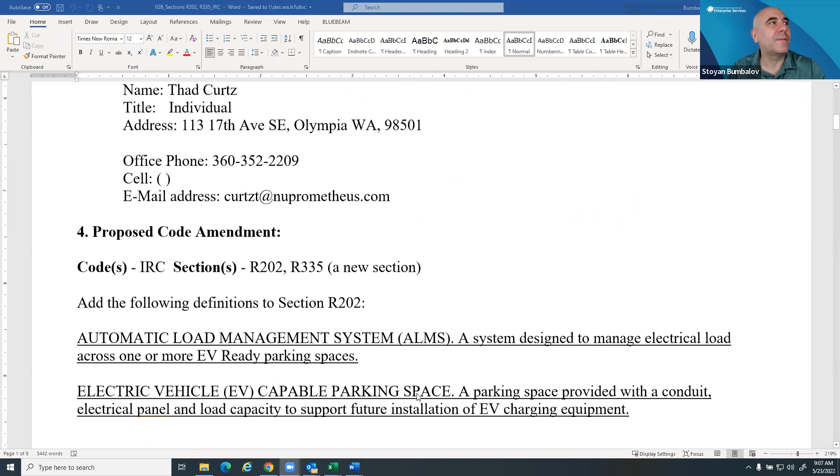So this is for electric vehicle. Yes, the proponent is here. Should I say something by way of introduction at this point? Absolutely. Oh, you get the stage.

HB 1287 requires the Code Council to adopt residential and commercial codes that will support the anticipated levels of zero emissions vehicle use that result from the state's zero emission vehicle requirements, and that will achieve the reductions needed to reach the state's greenhouse gas emissions limits. As part of reaching those limits, the state is committed to phasing out new gas and diesel light vehicles by 2035, and has just adopted a clean fuels standard and an aspirational 2030 phase out goal. These state policies will require a dramatic increase in EVs on the road and a dramatic increase in chargers for them, long before the buildings we're constructing now are obsolete.

Charging at home is the simplest and cheapest way to charge an EV. It's also much cheaper and easier to provide the means for that when residences are being built than for individuals, tenants, or owners of larger residential buildings to add that charging infrastructure later. The council has already adopted changes to the IBC in response to 1287's requirement. My proposal is intended to provide for the residential half of that requirement. As I understand it, there are several differences between Kathleen Petrie's proposal addressing this issue and mine.

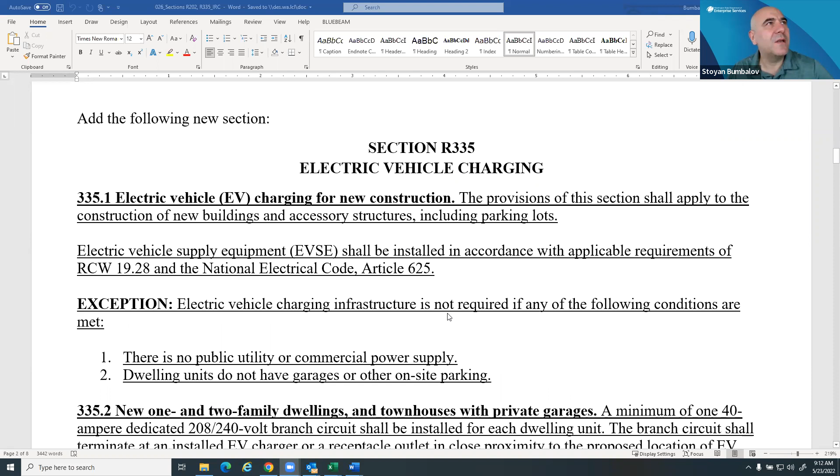Do you want me to start with the definitions? As far as I see, the definitions are the same as the definitions adopted in IBC. Is that my understanding? So I can skip the definitions then and get to the language right here. Micah, is that all right? That's perfectly fine. I can't remember, Stoyan, did we eliminate or modify some of the definitions for the building code? I know we had some that were doubled up or similar in scope, so I can't remember if we modified some of those or even changed one or two.

Do you mean between CR 102 and CR 103? Correct. No, we didn't touch anything. Okay. All right, then — do any of the TAG members have questions on the definitions? All right, I'll take silence as a no. Then we will start at the proposed change to, or new addition of, R335 for electric vehicle charging.

And again, I'll open the floor for TAG members to start discussing. This is Ron, I've got a couple of comments on it, if I could. Absolutely, please. Okay, so in there it talks about all new buildings and doesn't single it out as really for the IRC, which may or may not be a little bit of a conflict. When it talks about all buildings — so I live on a 25-acre farm and I want to build a machine shed for my diesel tractors, and now, because I have parking on the property, I have to put an EV charging station in. There's no exceptions for accessory buildings that don't even have electricity to them. So maybe he can address that.

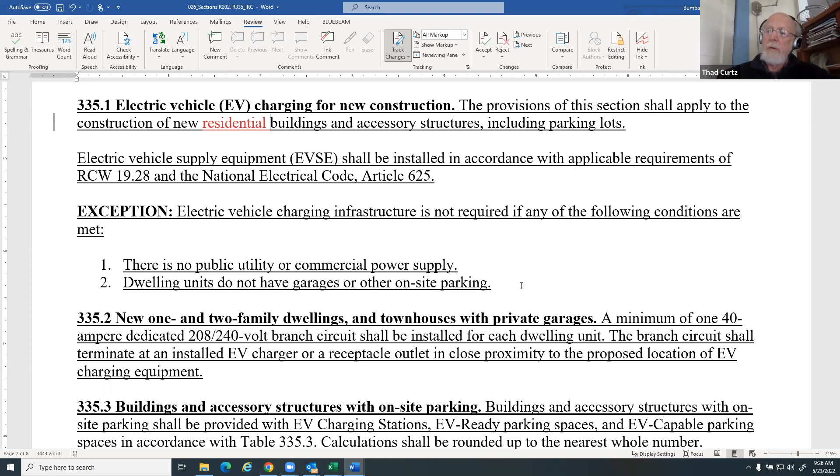No. As I understand the proposal, if you have a private garage, all you have to install is a 240 receptacle. If you've got a building with parking spaces that are not private, then you have the same requirements as the commercial code that the council has moved forward for public comment.

Thank you for muting. So in the proposed 335.2, you're saying there's a receptacle outlet in close proximity of where somebody may put in charging equipment. So the requirement here is for the electrical capability, is that correct?

Yes, it's to have an actual plug in the garage so that somebody can just buy a $400 charger if they get a car and plug it in there without having to do anything else. Or it's also possible to meet the requirement by actually installing a charger when the building is constructed, but that's not necessary in this proposal.

Okay, thank you, I appreciate you clarifying that. Thank you, Todd. Can we scroll back up just a little to the beginning of the section again? Starting right there is fine.

I do have some concerns with the charging language. Although it indicates it applies to new residential buildings, it says 'and accessory structures.' Obviously accessory structures are incidental to a dwelling, so this is telling me you would actually have to provide two outlets on a site if it had a dwelling unit and an accessory structure, because it says both. Then in the second line, the electrical vehicle supply equipment, you're pointing to the NEC, which may not be correct per the residential code, because the residential code does cover electrical items, however that may not apply for Washington state.

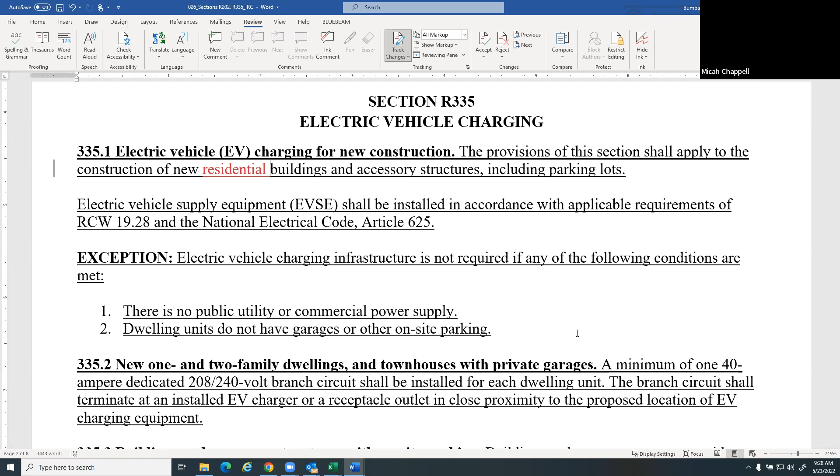Then we get into 335.2. I agree with Todd. The way I read that, it indicates it shall be installed as a charger or receptacle. But when you get into 335.3, that doesn't give you the option—it says buildings and accessory structures. So again, that will be two locations if they're both on the same lot.

For 335.3 says shall be provided with EV charging stations, period. That's what 335.3 says. So again, I'm going to parrot Todd's concern that this tells you your building and accessory structure for new construction has to be provided with a charging station. That's what 335.3 says.

Just to clarify one thing in relation to your remarks, my rationale for not allowing the receptacles if you don't have private parking is that if you have a receptacle and you plug your own charger into a space that's not private, you're exposed to somebody strolling along and unplugging your charger and walking away with it. So we'd go from having catalytic converters picked up and stolen to having chargers in non-private parking areas picked up and unplugged and walked away with. I don't think that's very satisfactory.

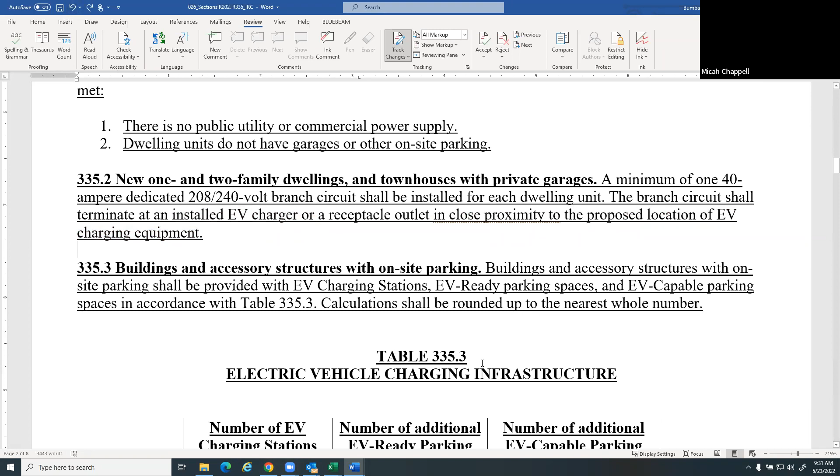That's fine, it can be either/or in that scenario for the private garage, if that's what the proponent wants. I do have my concerns with the way it reads, but really my other concern is going to be 335.3, which states if you have on-site parking, you have to provide EV charging stations at your building and your accessory structure.

Others can go ahead. Quinn, go ahead, you have your hand up. I was wondering, if it changes to buildings, or changing 'and' to 'or,' would that be better?

I'm not sure, I think it still says if you have one or the other, you still have to provide on-site or EV charging stations just because you have on-site parking. And I probably read it differently than others.

Jen? I think you're muted, Jen. Thanks, I have the same concerns that you just expressed. Also, again, seeing that maybe this language is sort of borrowed from the IBC. What is on-site parking? I don't know if that's a definition above, but that's not really clear.

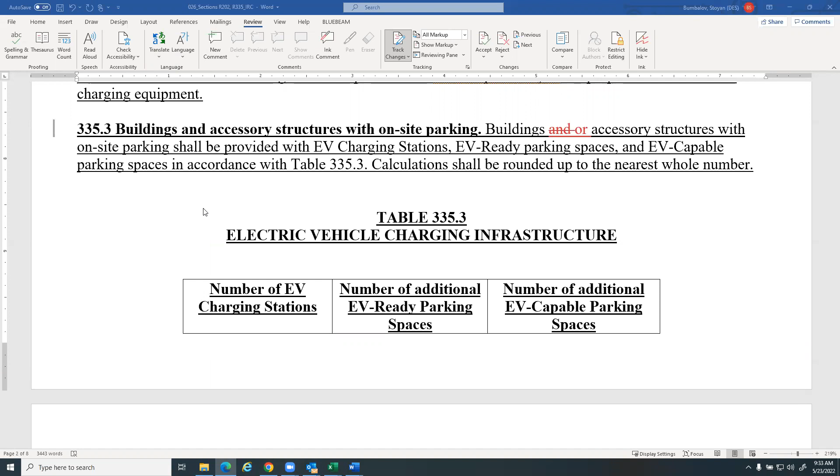As clear as IRC. So with, say, an apartment building, there are defined parking spaces. But if you have a detached garage and a gravel drive that goes over to it, is that considered on-site parking? So how you even split those hairs is unclear. If you have an accessory structure in the backyard with a garage and a driveway at the front of the house, what is considered the on-site parking for that accessory building in the rear?

And above here, 335.2, so you have a new single family residence. You may also have an accessory dwelling unit within that new single family residence, which hasn't been really common until now because land use guidelines have prohibited that, but that is changing as affordable housing is needed. So you could have a new single family residence with an accessory dwelling within it, and then a private garage that is only accessible to the main home. But now you're going to need two circuits within that garage, even though the occupants of the accessory dwelling unit may not be able to access that garage. Does that make sense?

Seems so, I think I see where you're going with that. So it sounds as if I need to look for some new language that will clarify this issue. I had thought that if you had a single family residence with a detached garage, that would count as an accessory structure, but it's obvious there are some other accessory structures I hadn't thought about. So I think I should probably try to work out a revision of this language and bring it back.

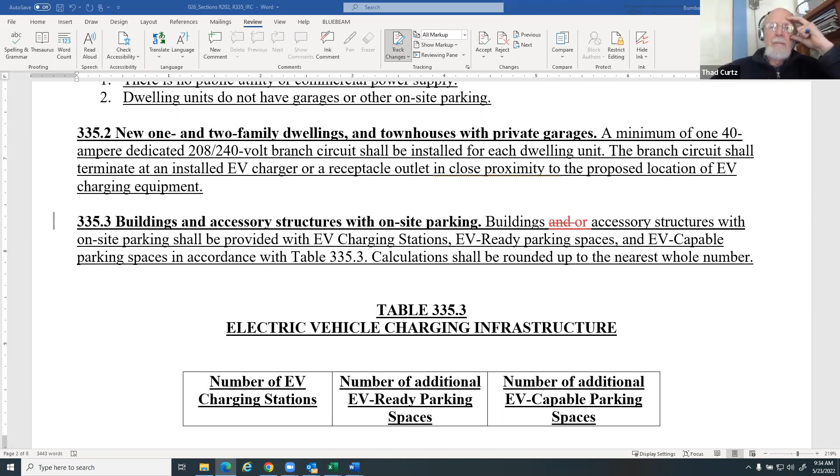Okay, sounds like an idea. Jen, you have your hand up again, and Quinn. Yeah, some accessory dwelling units may not have any parking at all, so just keep that in mind. And also the exception seems misplaced - it's like we have the exception before we have the requirement, in a way. So organizationally, it seems like we typically say this is exactly what's required, and then here's the exception.

Thank you for those recommendations, Jen. Quinn? Yeah, so I might be a minority on this one, but I actually kind of like the direction that Thad is going with this. Some of the concerns that were raised, I just personally don't see it - at least that's not how I would have interpreted some of the language. But I do see there could potentially be confusion moving forward with the way some of the language is written. So Thad, if you take some of the recommendations we just talked about and clean it up a little bit, it would definitely be a lot better. But for the most part, I like it. And I don't have a huge concern over any of this stuff because that's how I interpret it, so I would have voted for it with some caveats.

But if you come back later with some changes, like putting the 'or' in there - I wasn't too concerned with Jen's concern about the ADUs, because it's a single family residence with an ADU, so it's still considered a single family residence. So that garage, if I were to review it, I would still only require one. But anyways, just clean it up a little bit, and I think it might be better moving forward.

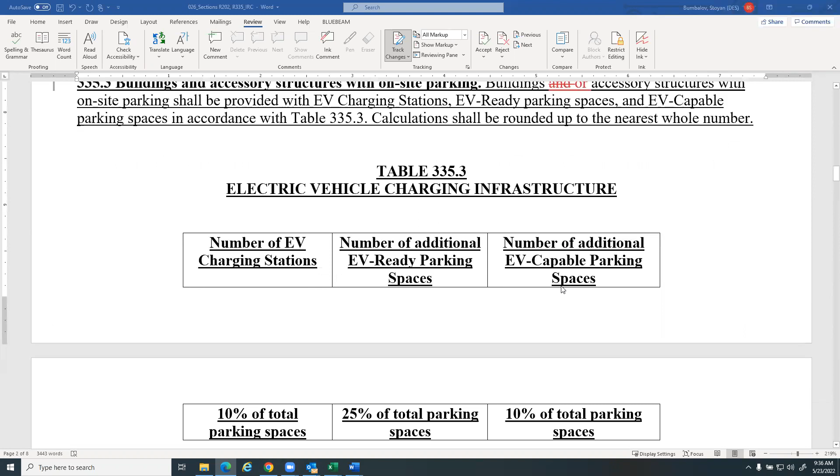Great, okay, so I just need some clarity on how this table is enforced. When I see this, say I've got a 2-car garage with parking out in front of those 2 doors to my garage, I'm understanding those as being 2 on-site parking spaces. Therefore, I need to follow this table to determine what additional features I need to build in.

As I'm looking at this, number of EV charging stations, 10% of total parking spaces, round up to the nearest full number, therefore I need 1 EV charging station. Going to the next column, number of additional EV ready parking spaces, 25% of total parking spaces, so I would need an additional EV ready parking space over and above the EV charging station.

Then I go to the 3rd column, number of additional EV capable parking spaces, 10% of total parking spaces. I'm adding another parking space because up in the charging language, it talks about 'and' - EV charging station, additional EV ready parking spaces, and EV capable parking spaces. Is it your intent that you would actually require 3 additional features with regards to EV charging?

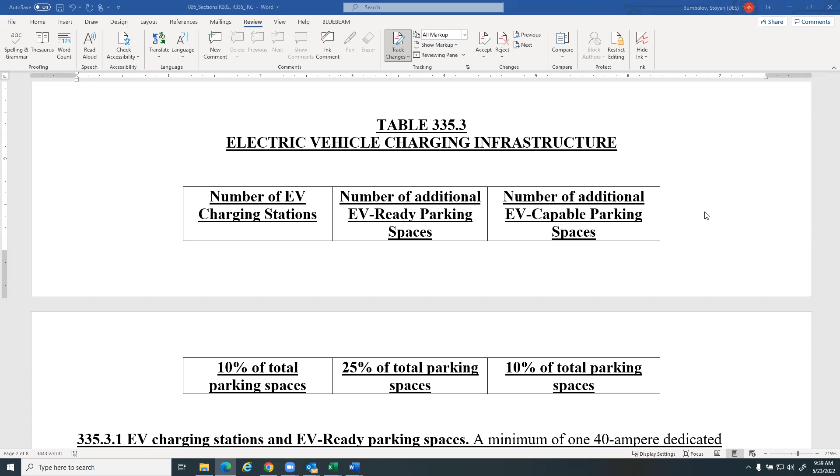I think we need to look at the scope of what the International Residential Code actually covers and keep that in mind, because the bulk of what you're building with the IRC is single family residences. So you're not talking a 40 unit townhouse project, that would not be something under this code. I think it is confusing in the way the charging language says you're going to have each of these, and here's the table and the percentages round up to the nearest whole number. Just following the words on the page, I'm coming up with a requirement that you have 3 features at that 2-car garage.

So if I have a townhouse that has 50 units with shared sidewalls, that's not built under the residential code? That's what this is intended to apply to. If you have property lines separating each building as its own property, its own lot, it would be its own building permit. But if I don't have property lines separating the buildings, if it's a 40-unit townhouse for rentals, I don't see that being built under the IRC, and maybe one of the building folks can chime in.

We have a hand up from John, did you want to provide some input on that? Yeah, just in response to that, yes, theoretically, you could build a 40-unit townhouse, 50-unit townhouse, whatever, under the IRC. It's not generally done, but it can be.

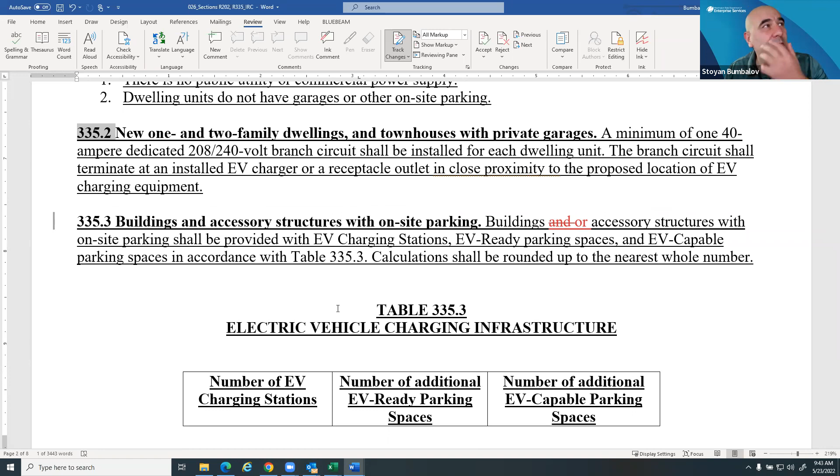So we have 3 different types. We have 1 and 2 family dwellings, this is the first one. We have townhouses with private garages, this is the second. And then we are going to 335.3. I think, listening to the comments, I think you folks are mixing up 335.2 with 335.3. So if you have garages, then you're under 335.2. This is how I see it. But in 335.3, this is for common use parking spaces. At least when I was reading the additional information, this is what I got.

Okay, 335.3.1. I do think that's one way to interpret it, Stoyan. When I look and read 335.2, if you want to scroll back up since you were discussing that. If there's no private garage for 1 and 2 family dwellings, I would interpret that if there's no private garage, then you would have to go to 335.3 to find your required EV, either capable, ready, charging station, whatever. That's how I would interpret how this is written, and others may chime in to see if that's the same, but that's how I read the titles there in the charging language. 335.3 would apply to everything that doesn't have a private garage that is provided with on-site parking.

What about that? What about detached garages? Where would those fall? It doesn't really specify between attached and detached garages. It says just townhouses with private garages. Right, again, based on what I saw with the additional documentation.

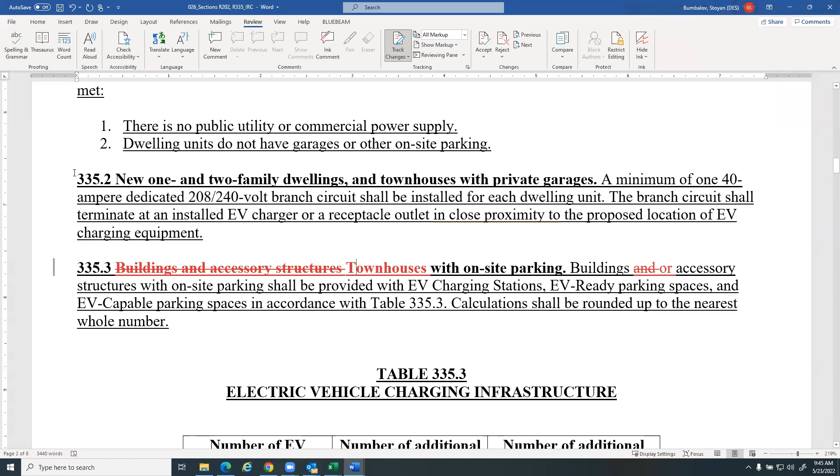Hey, so John, again, what would you follow, 335.2 or 335.3 for a detached garage? I would apply 335.2. What about if it didn't have power to it? Well, then the general exception would apply.

Would there be an opportunity or a friendly amendment for there to be clarity on parcel versus building specific on that particular exception? Oh, I can't speak for the proponent, but I think he promised that.

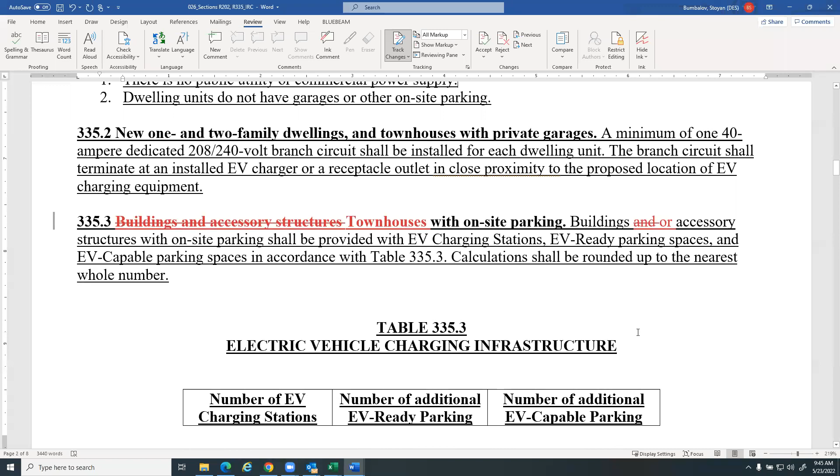Okay, so with regards to 335.3, can we choose to put in an EV charging station, an EV ready parking space, or an EV capable parking space? It's, you know, what are we supposed to install under 335.3?

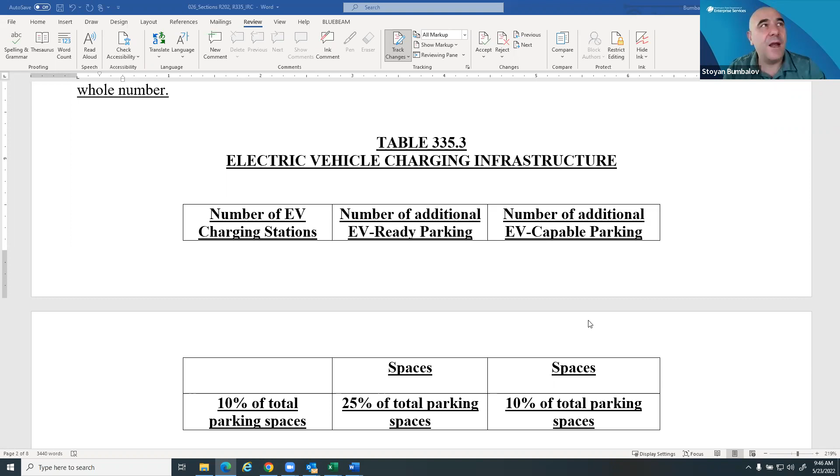I just compared with what the council adopted for IBC, and the language seems similar, if not the same. So for 335.3, it makes it the same. I'll give you an example. You have a row of 50 townhomes built under IBC versus the same type of building structure, but built under IRC. And the proposal is the same here.

You need 10% with electric vehicle charging stations. You need 25% with EV ready with receptacle, and you need 10% with conduit. And so I wasn't the proponent for the IBC proposals, and I don't necessarily agree with it, but it was adopted. That's okay. Thanks, what I'm saying.

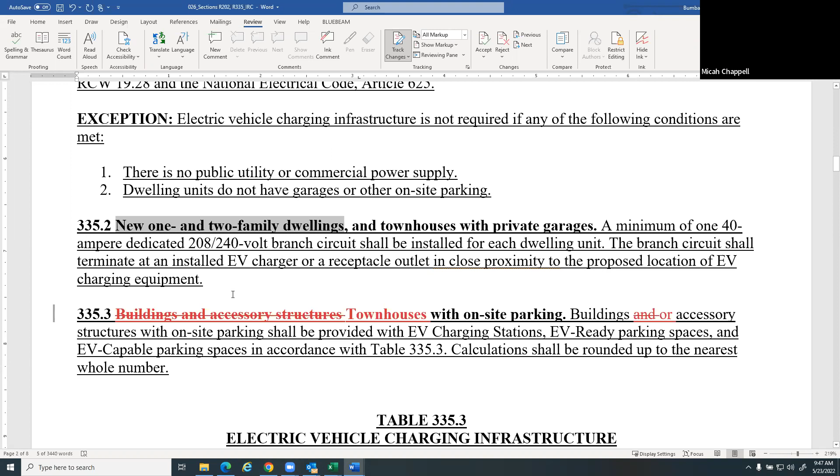Yeah, sorry, just from a code writing standpoint, first of all, remember that section titles are not enforceable. So you need to incorporate whatever you're pointing at into the charging language. The way I read 335.3, it says buildings shall be provided with these, so it doesn't apply to the parking lot. That's the way, if you're reading it literally, that's the way I would read that. So just again, some language clarification and some better charging language would probably help here.

But John, do you see that requiring at every building a charging station, an EV ready parking space, and EV capable ready? Well, it depends on what the current language is, not clear. I'll say that if the charging language is improved, it could help answer that question. I think the charging language in 335.2 needs improvement as well, for the same reason, kind of to say that this applies to all 1 and 2 family dwellings and townhouses. If you've got a private garage, this is what you do, whether attached or detached. Again, that should be part of the charging language.

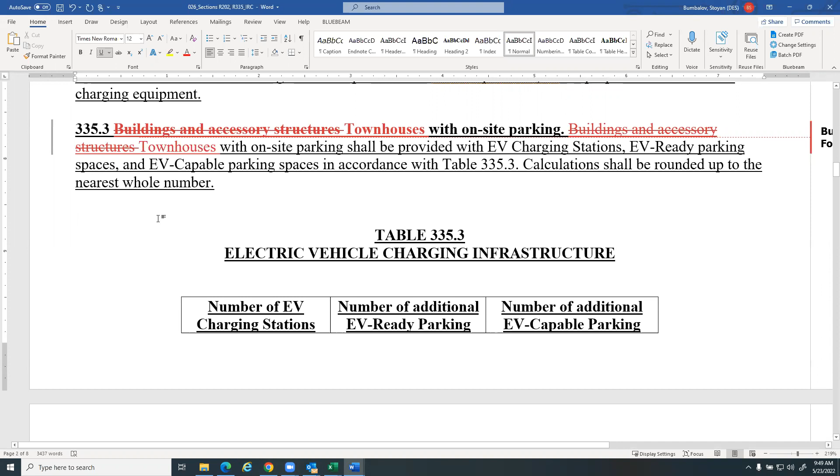Okay, thank you, John. Darin? Just a quick clarification on 335.3. Stoyan, was that supposed to also include accessory dwelling units?

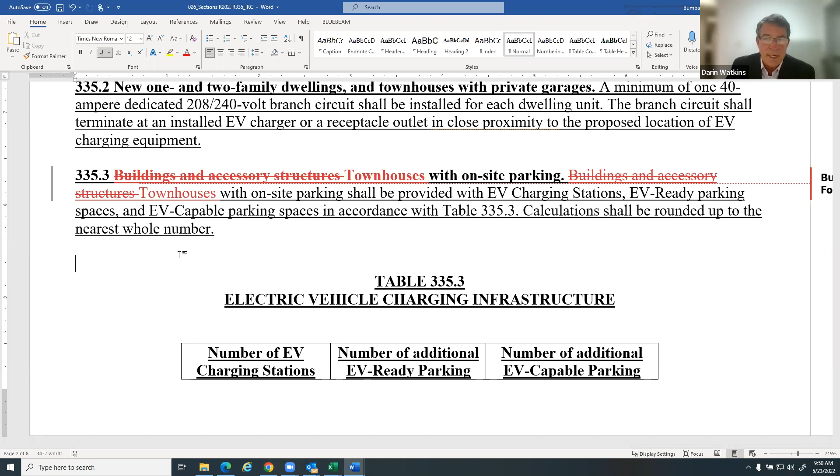Well, again, I'm not the proponent here, but comparing to the rationale for section 429 in the building code, it says it was trying to cover on-site parking. So you have the on-site parking for a row of townhomes. I guess this was the intent. I don't know if it's a good explanation in the section, but this is how I read the rationale behind it. The reason why I ask is because many of the accessory dwelling units are no longer being required in the Seattle and King County area to have dedicated parking spaces, and I'm curious how this language would address that.

Well, if it's 335.3, it captures the number of on-site parking spaces, it doesn't capture the number of units. Again, I'm reading the rationale for 429, and it seems the language is similar. However, I want to caution that this is a different code, and there's reasons it is a different code, so the language is not going to align or match.

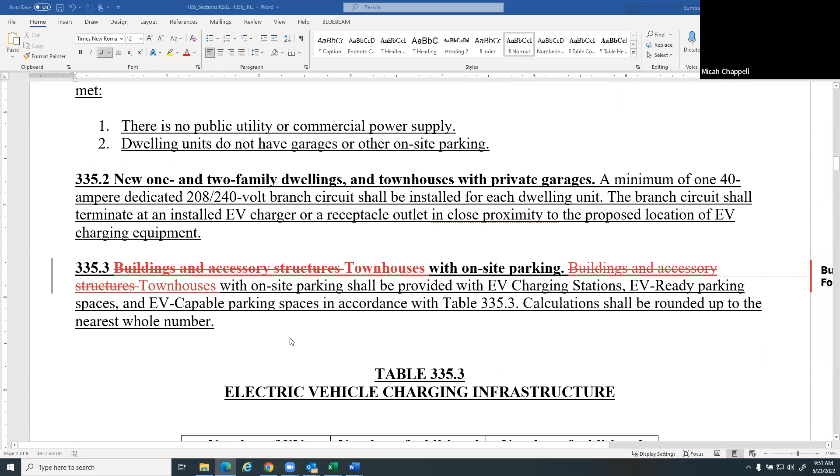Darin, my thoughts on accessory dwelling units: technically they are not in the residential code, they're just a dwelling unit, not something special. So this may do better to modify the charging language to be more clear, in that it seems like the proponent, and I don't want to put words in your mouth, Thad, wants some type of charging infrastructure for each dwelling unit, whether it's an accessory dwelling unit or a regular dwelling unit. I don't think the charging language gets you there, in my opinion.

Micah, when you say the charging language, which section do you want me to note? I think if you're going to modify the charging language, it should be the beginning, 335.1, because right now you're saying this section applies to new residential buildings, that's anything that can be classified as a residential building. Maybe that needs to be changed to dwelling units, or dwelling unit, singular.

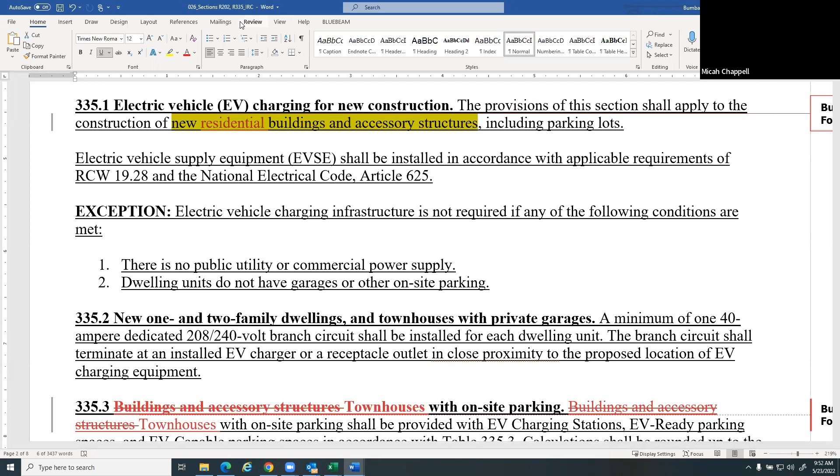And we're spending quite a bit of time on this. We should move on down the proposal a little more, get Thad some more information, and get on to some of the other proposals. I know we have a lot of big ones on the plate today, so hopefully we're giving Thad some direction. But let's move on to the next couple of sections of this proposal, please, Dwayne.

Yes, sir. Micah, can I chime in really quick? For some reason I don't have my hand raise button, I don't know if I need to restart Zoom or what.

This is Damon Doyle. Starting in 2011, we started putting in 40 amp 240 circuits in all of our projects, and in fact we started it on a townhouse project. It seems to me we have a lot of language in here that's commercial and not residential. One thing we did not do was actually put in the charger itself, so we just ran the circuit and put a blank cover over it, because there are 3 different types of charging circuits and we didn't know what people were going to choose. In most cases they're hardwired, not a receptacle. So I think simply providing the circuit so it's there for people to later put a charging station in is most appropriate. Currently less than 3% of cars on the road are EV. Granted, we know that will rise, but at least 9 out of 10 people who buy these units are not going to use these circuits. I would like to see this language simplified to say A, just a charging circuit, and B, for each dwelling. I don't think we need to go into parking spaces or anything else.

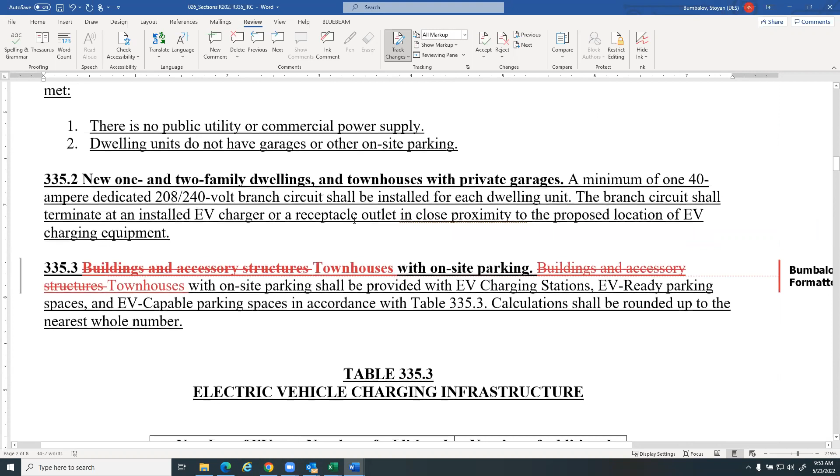That's all. Okay, thank you, Damon. And for those of you not aware, Damon is a current SBCC member representing residential contractors or builders, if I'm correct. That is correct, thank you. Appreciate you being here. Is it 335.2, Damon? Yes, that's perfect. If you had that as well as the 2 exceptions above, I think we're done.

Okay, thank you for that recommendation. That's something Thad can take into consideration when he brings some modifications. Let's go ahead and scroll down, Stoyan, and get into a little more and provide some additional feedback. That way, if Thad decides to come back with a full proposal like this or something simplified, he's got enough information.

All right, I'm going to again open it up for some comments to this section or these sections. I mean, I should just say this is exactly what the council adopted for the commercial requirements that it's moving forward with. And I did it this way basically because I thought it would be desirable to have consistency between the IRC's requirements for big townhouse construction and the commercial requirements. But...

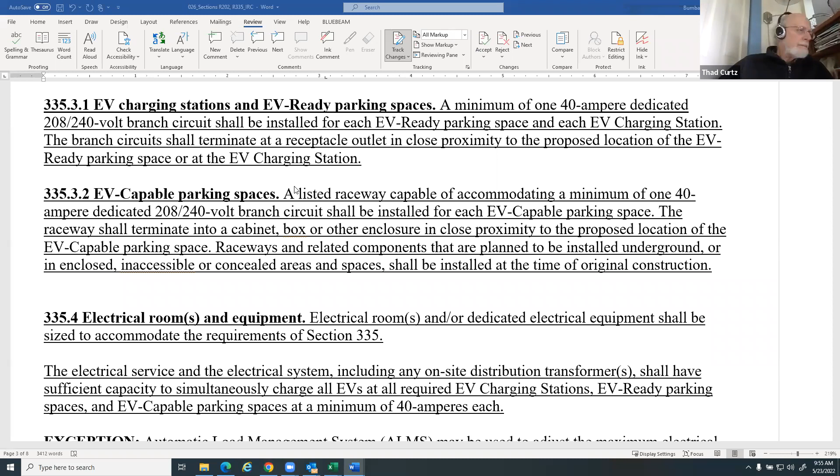Okay, thanks for that comment, Thad. Anybody else on these sections?

All right, I will provide a little input from me. I think that 335.3.1 is redundant, and then it also seems to indicate it's something further than what was required above, where the indication above was a receptacle. This says that if you have an EV ready parking space, that you have to provide more. It just seems to try to align with the IBC, but I don't think that's the best route.

This also talks about 335.3.2. This again is getting into electrical installation requirements, or raceways are covered by the NEC or other parts of the residential code. And this gets into a new section, a new chapter that probably, if we're going to use other sections, should just point to those sections and not duplicate the language.

And then this talks about a raceway. And correct me if I'm wrong, Damon, it's been a long time since I've done residential electrical, but normally in a residential building, you're not going to have a raceway. You are just going to install some type of probably non-metallic cabling within the wall space. Now, if you have a parking space outside, maybe that's still attached to the structure and within the wall space, or maybe at that point, if you have to go underground somewhere, you would need to provide a raceway. But this is saying you need to provide a raceway no matter what, and I'm not sure if that's correct.

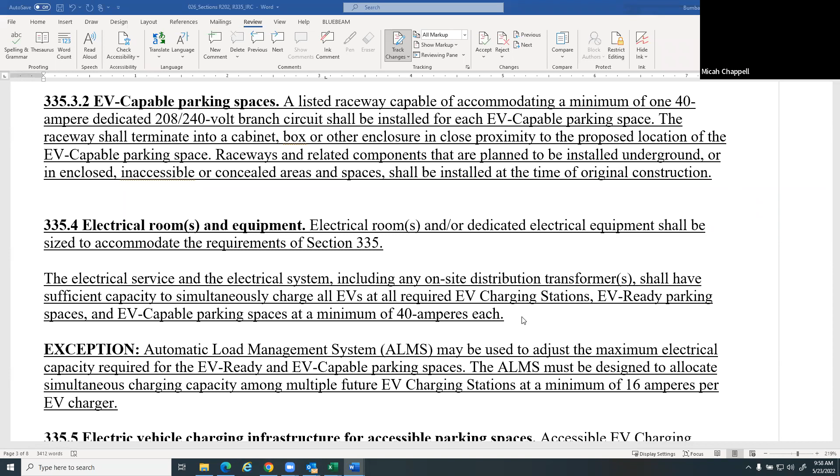All right, and then this last section, 335.5, I'm not necessarily opposed to this. I know that a lot of folks will say accessibility doesn't apply to single family residential. However, that may be a little different depending on the number of units you have for townhouses. But again, I could go either way on that section, but I will open the floor for discussion on that exact point.

There's no discussion on location of the charging stations, especially when you get to the 50 unit houses. So it's supposed to keep them limited, or how are they located? All the discussions we're having in our local zoning code is that they seem to be pushing ADA parking stalls off to the side so that these become more of a priority.

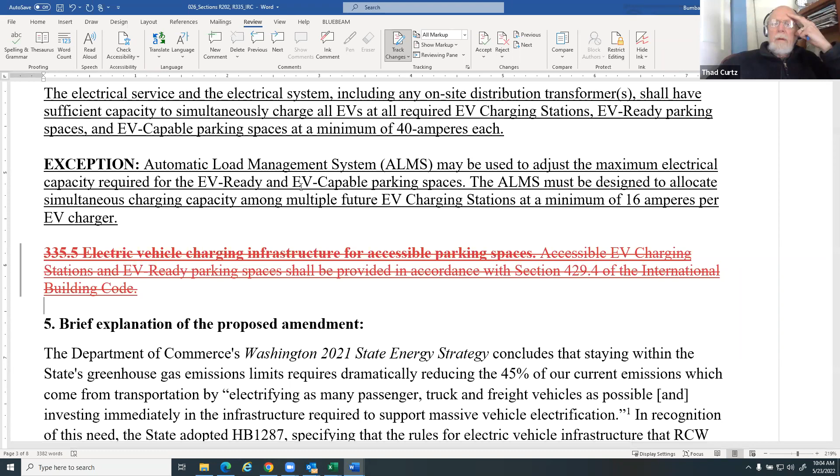Okay, thanks for that. Go ahead, Thad, did you want to respond to that real fast? No, I will listen to the recording. It seems like we've taken a lot of time here for this. I'll listen to the recording and come back with a revised proposal next month. All right, thank you, Thad, I appreciate your time. I will email you the document with the notes. Thank you very much.

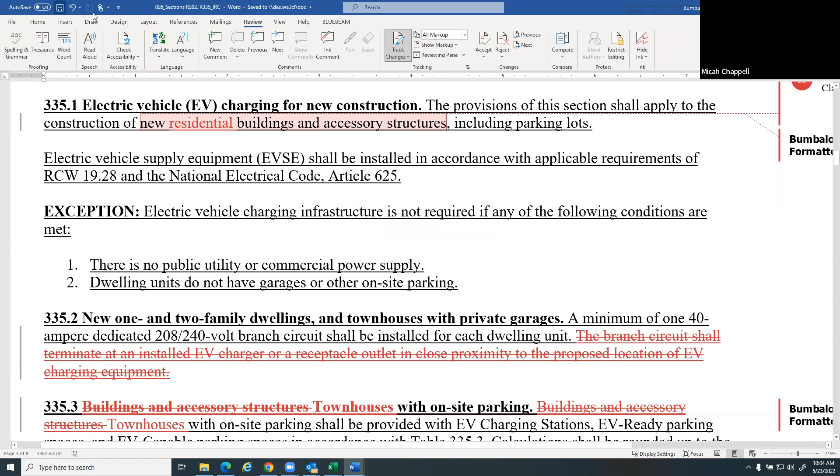Here it is. All right, this one's going to be a similar topic. So I will turn the time over to Kathleen to give us a little background on your proposal, and then we'll start discussing the sections.

Yeah, thank you, Micah, and hello, everybody. I'm Kathleen Petrie with King County.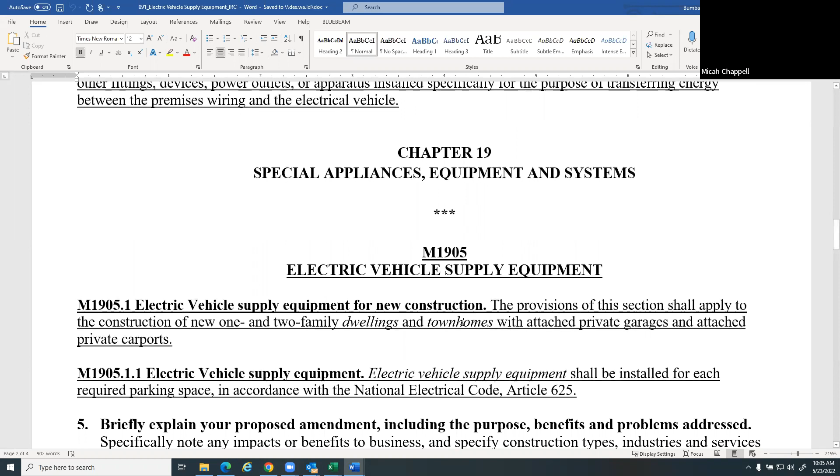Just wanted to have a proposal submitted with respect to EV ready. So whether it's Thad's proposal that moves forward or this proposal, either is great. We just want to have that infrastructure in there because of the zero emission policy by Washington State, 100% EV sales by 2030, or non-combustion sales. And so essentially, it's where there's required parking for attached private garages or townhomes, or carports attached to a single family or townhomes, that you have the required space be EV ready.

And so I didn't know if this should land in chapter 19 or in chapter 3, so I just took a crack at one of them.

The other bit is that I'm still a bit confused by the definitions in the IRC. Typically in industry, you've got EVSE, which is all the infrastructure plus the installed charger unit. Then you have EV ready, which has the circuit, wiring, and up to a junction box or outlet. The electrical code's EVSE doesn't necessarily specify that it has the charging unit at the end, so I didn't know exactly which term to utilize. But the intent of this proposal is that the space is EV ready. That's what I'd like to share. Thank you.

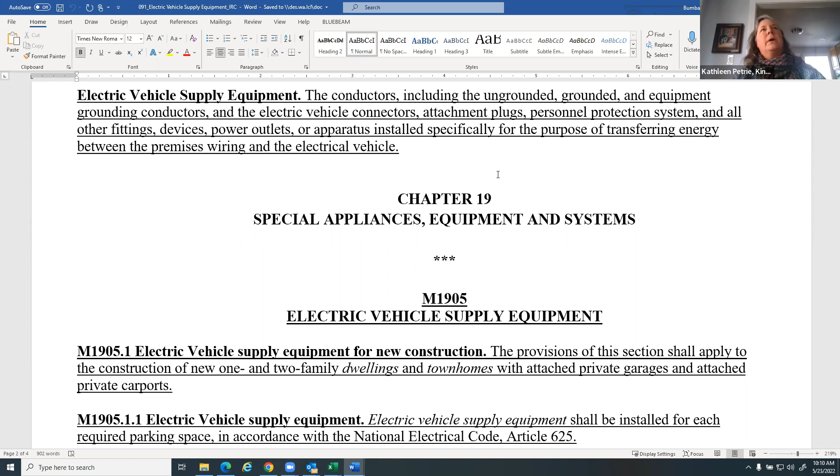Okay, I'm hearing you. So my interpretation of most codes is they would have like 1 space required per single family and/or townhouse unit. So I'm not sure the 3 would be triggered. So if just by switching the text to dwelling versus required space, would that be an appropriate change? In my opinion, yes. I think that keeps zoning departments out of the picture when it comes to identifying where EV parking spaces are required, because there are jurisdictions that don't have any requirements, and there are jurisdictions that have 2 requirements. It doesn't seem appropriate to have it change from one jurisdiction to the other. So let's just go ahead and clarify it and say for each dwelling unit.

Okay, thank you. We have a hand up by Darren and then Quinn. Yeah, just of note, the construction cost analysis was done in 2016 based on 2014 to 2015 data. That cost, I can guarantee you, is extremely low compared to realistic prices today. Just for example, the panel alone has gone up in price from about $540 in 2015 to about $2,200 right now, just for the panel. So as we're trying to stay consistent with good numbers, we ought to try to find something a little stronger than a 2016 study. We'll do so. Thank you.

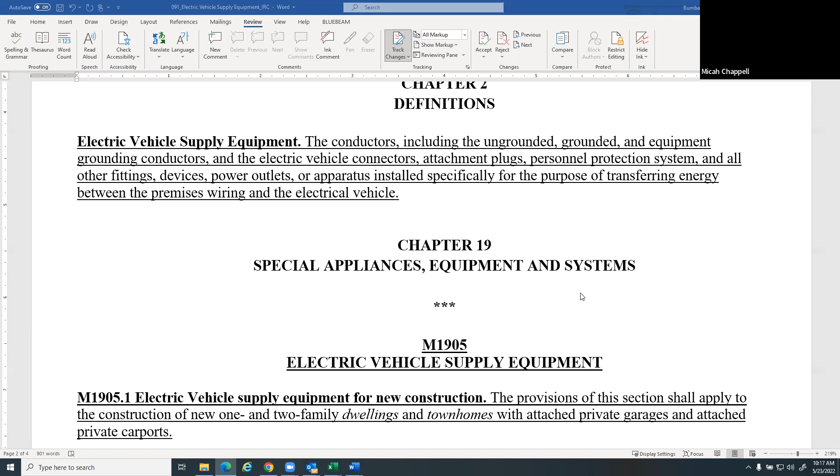And then as to the section, I do have a little concern with where the section is based, just on the charging language for mechanical. It states that the provisions of chapters 12 through 23 shall regulate the design, installation, etc. of mechanical systems that are permanently installed to control environmental conditions within buildings. So I don't think that section is correct, because this is not controlling an environment within a building. I do believe maybe that would fall better in one of the electrical sections, and I think that starts at chapter 34. That's just my initial opinion if we're going to put it in a further section in the IRC.

Okay, great. Thank you. Appreciate that. And then Thad, you have your hand up. Please go ahead.

From the point of view of a homeowner, I want to argue strongly in favor of a receptacle rather than a junction box. Most homeowners are not going to mess with adding a receptacle to a 240 circuit, even if there's a junction box there. So from a homeowner's point of view, having a junction box means finding an electrician and getting bids and paying for that upgrade.

Whereas if the receptacle is there, they can just plug in. As far as the different charging standards go, my understanding is that currently for level 2, 240 chargers, there are really only 2 standards. There are 3 standards for 480 chargers. But for 240 chargers, there are 2 standards, and one of them is going to go away. In any case, the actual plug configuration is irrelevant, because you're buying a charger that has the plug configuration you're interested in for your car, and then you're plugging the charger into the standard 240 NEMA outlet. So I think a plug will work fine in this situation.

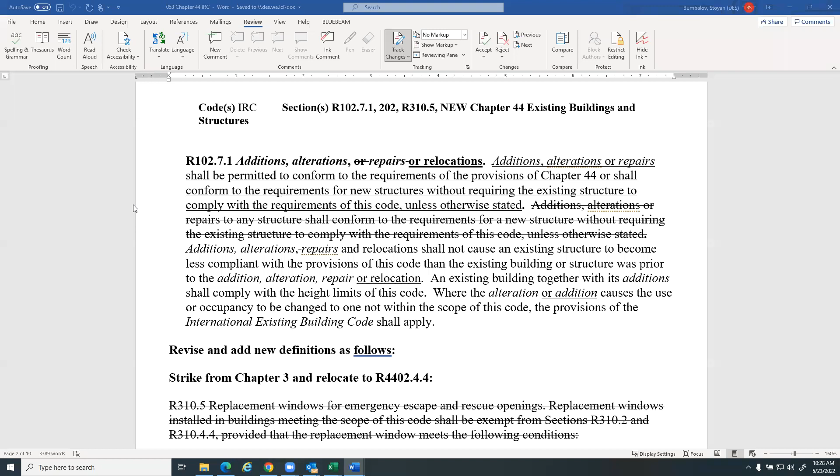Okay, I think maybe you can walk through it, and as folks process it, we can start asking questions. Okay, let's scroll down a little bit. The next modification is just deleting some text from chapter 310.5 regarding replacement windows, and it's being put in this new chapter 44.

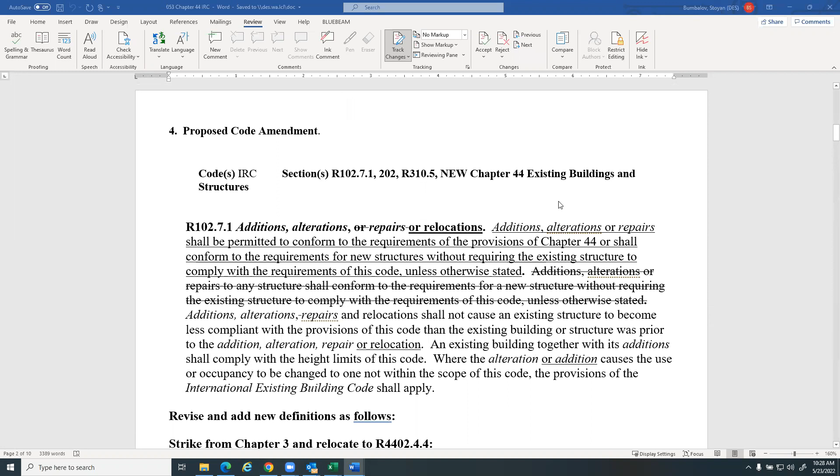I have a question, and I can't see the scrolling screen here, but in 105.3, there's a discussion about unless there's a change of occupancy. I think I asked this before, but would like clarification. So if I have an unfinished basement in a 1940s home and I create a bedroom, is that going to be considered a change of occupancy?

Yes, it would, if it was an unfinished basement and it was not previously habitable space, then yes, that's a change of occupancy. Well, let's say it was just a family room, so it was finished and it was habitable space, and now they want to just frame in a bedroom, but we have an undersized window. Right, so then that would not be a change of occupancy because it was single family habitable space previously, and now it's going to be a bedroom, which is still single family habitable space, but you would just need to meet the requirements for window replacements in this new chapter 44.

All right, thank you. Okay, Sue, I have a question about striking 310.5. If chapter 44 is optional, where would this section go if somebody chose not to follow chapter 44?

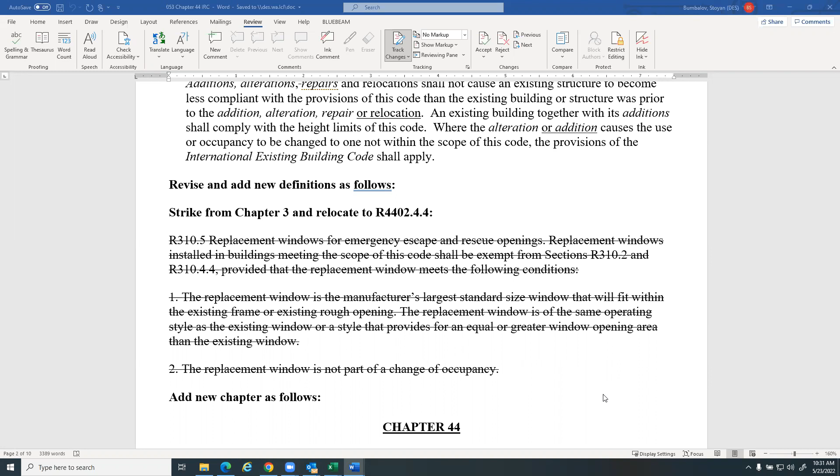So moving on, chapter 44, scope and purpose - it still applies to repair, alteration, addition, and relocation of existing buildings and structures. Again, the purpose is really to try to culminate existing building provisions into one chapter, and kind of sweep them out of the new code requirements or the new structure requirements as much as possible. So then the next section is just a section on compliance.

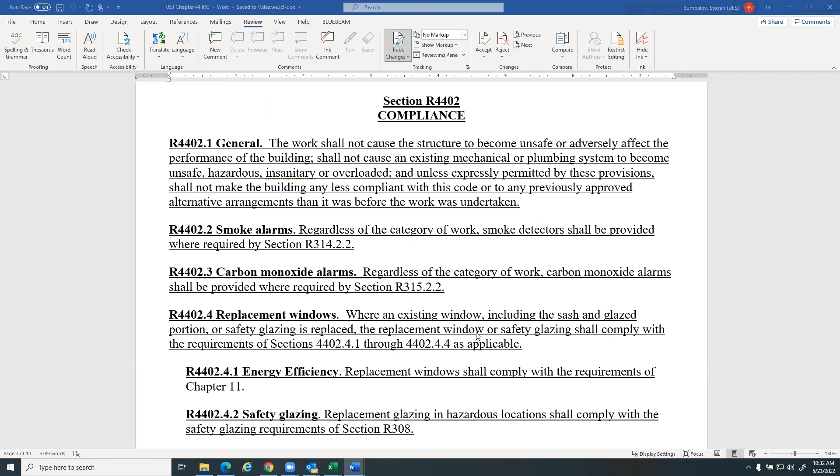So it talks about how you have to have smoke detectors, carbon monoxide alarms. And then this is the section on replacement windows, which talks about the requirements for how the replacement window, energy efficiency, safety glazing. Keep going. Fall protection for windows. And then this is this kind of duplicate section that got moved from chapter 3, replacement windows for emergency escape and rescue.

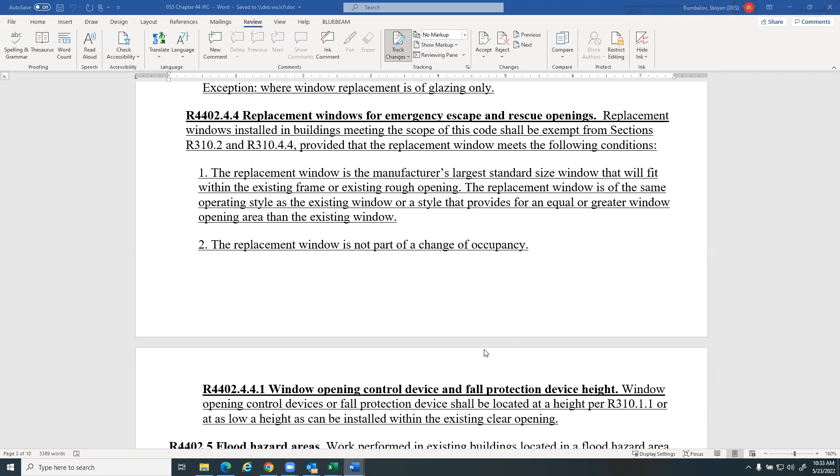And it talks about what provisions are allowed, that you put the manufacturer's largest standard size window that will fit within the existing frame or existing rough opening. And again, this is the replacement window is not part of a change of occupancy. So if that was never allowed to be a habitable space and you're changing it from storage to habitable space, that's a change of occupancy.

So window opening control devices and fall protection device height, flood hazard areas, features exceeding code requirements. These are a lot of things that just sort of moved from the appendix chapter into this new chapter.

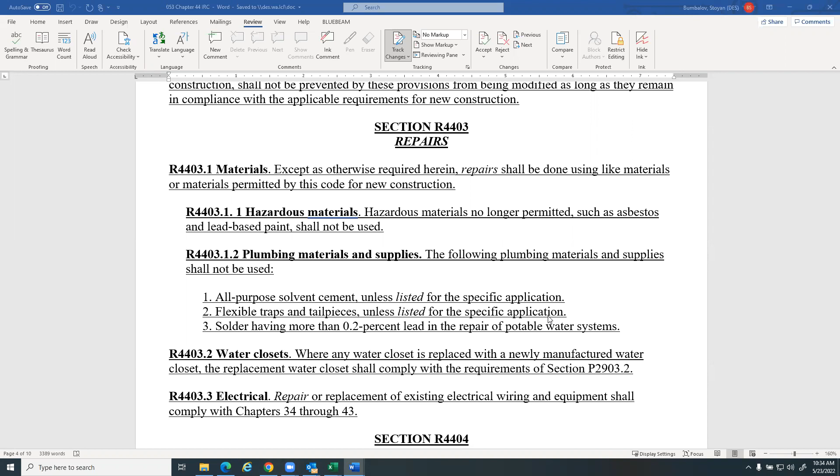And then next we have a section on repairs, specifically repairs, and it talks about materials - it shall be done, repairs shall be done with like materials, hazardous materials which are not permitted, plumbing materials and supplies, water closet, electrical. And again, these are similar to the section on repairs that was already in the appendix chapter.

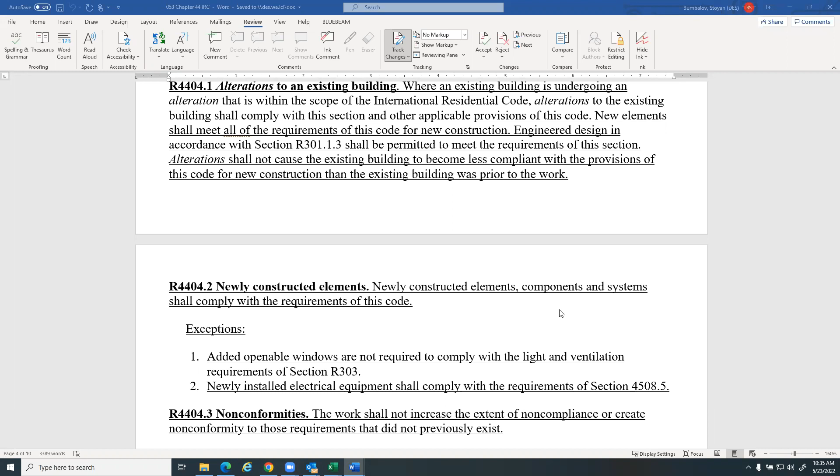And scrolling down, we have a chapter on alterations. This is similar to the appendix chapter. New elements shall meet the requirements of this code for new construction. Talks about engineered design shall be permitted. Alterations shall not cause the existing building to become less compliant. And then newly constructed elements shall comply with the requirements of this code. And then the exception is openable windows are not required to comply with light ventilation. And newly installed electrical equipment shall be required to comply with section 4508.5.

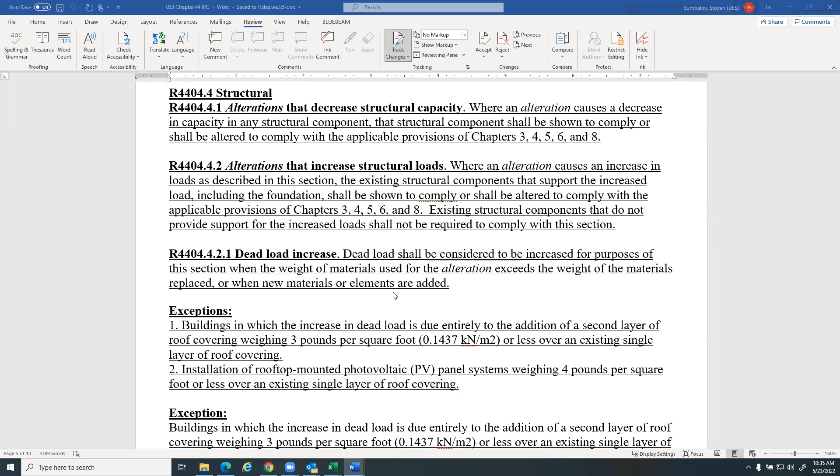Structural - there's structural alterations that decrease structural capacity, and then there's alterations that increase structural capacity, and then dead load increases. And then there's some exceptions with that. So we do have a chapter that kind of specifies when we get concerned about alterations with regards to structural strength.

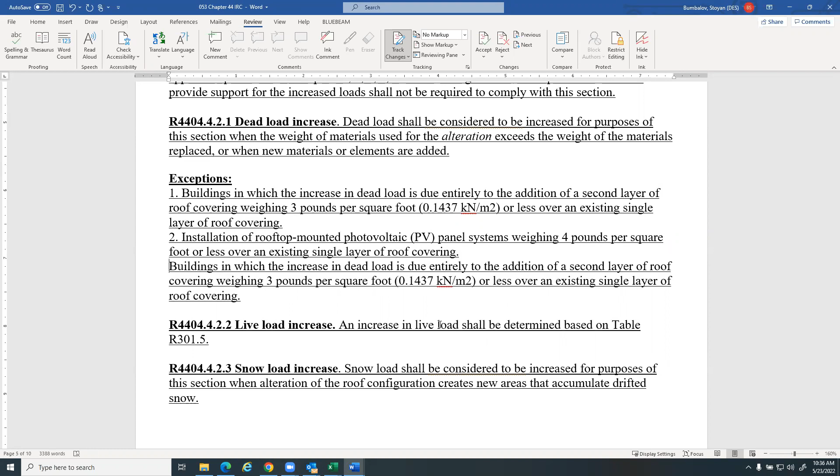I think in this case we probably need to combine these exceptions into 1, 2, and 3. I'm not sure why there's 2 separate. Anyway, yeah, so then this just goes on - there's a live load increase and snow load increase on here too. Just specifying when you need to be concerned with the increases in live loads, snow loads, or wind loads, or seismic.

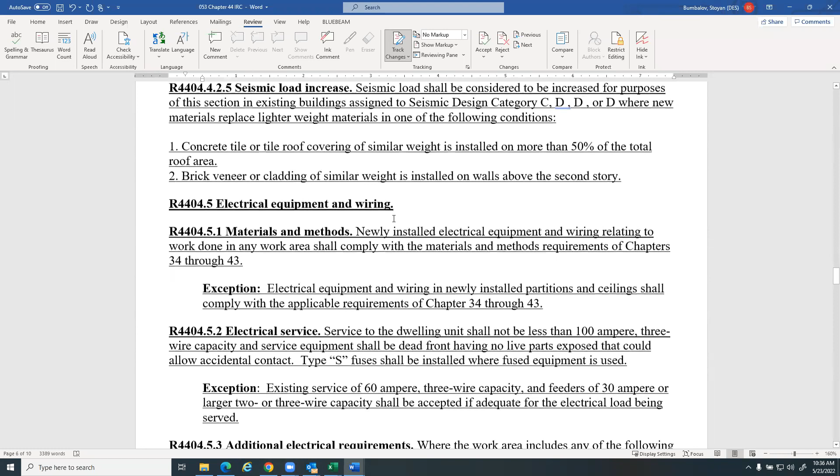And then the next section is on electrical equipment and wiring methods and materials, electrical service, additional electrical requirements, enclosed areas - shall have not, so just specifying how many duplex receptacles. And again, much of this is just moving information that was in the previous appendix chapter. You can keep scrolling.

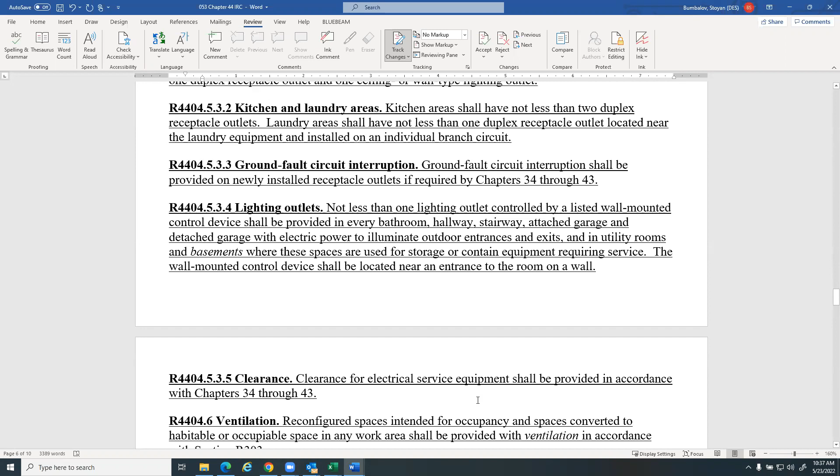Yeah, these are just requirements for lighting, ground fault circuit interruption, clearance requirements, and then there's some ventilation requirements, ceiling height. This is one where we have made some changes - the 6'8" requirement was, I think that's a real benefit for builders to be able to use a shorter ceiling height, because that's where we really have some issues with trying to get these habitable spaces in either attics or basements.

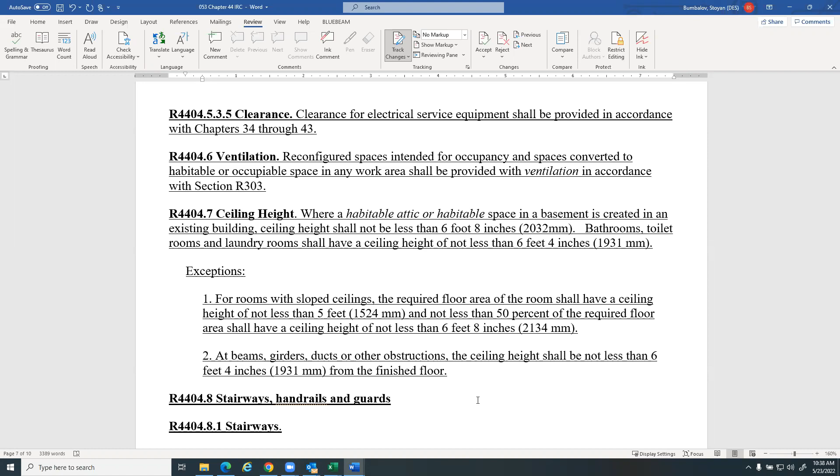And so we do say habitable attic, which was not part of the original appendix chapter, but we're proposing it also be applied to habitable attics or habitable space in the basement. So not having to comply with the taller ceiling heights for some of these existing buildings really makes sense. And these are some provisions on stairways, handrails, and guards, which again is another area where it's really hard for existing buildings to comply.

Especially headroom, like headroom height on existing stairs being altered or modified, shall not be reduced below the existing stairway finished headroom. So some of those kinds of things are just us being reasonable for an existing building. They're just never really going to be able to comply with some of these standards for new construction.

And keep going. For me as a building official, I get a ton of these for residential. Like, okay, can't we be reasonable and not have to comply with the higher ceiling height or the stair headroom, those kind of things.

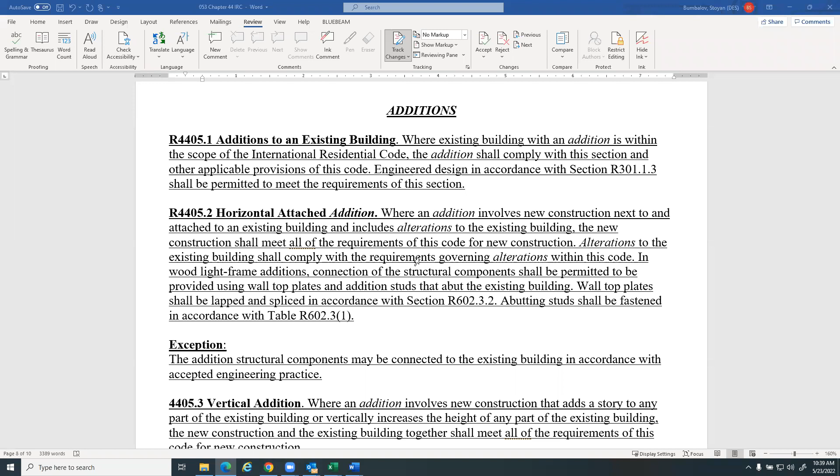Additions - this is a section that wasn't in the original appendix, but we added it because it seemed to make sense to have a chapter on additions in this new chapter as well. A section on additions to an existing building, where an existing building with an addition is within the scope of the IRC - the addition will comply with this section. Horizontal attached addition.

We do talk about that - alterations to the existing building shall comply with the requirements governing the alterations in this code. And then we talk about wood frame light construction requirements being permitted to be used. And then we have a section on vertical additions as well.

And then the last chapter is on relocations. So relocated buildings or structures moved into or within the jurisdictions are not required to comply with requirements of the code if the original use is not changed, and compliance with requirements of this chapter is required if the moved building or structure undergoes substantial alteration.

Work performed on new or existing foundations shall comply with all the requirements of this code for new construction. And that's it.

I'd be happy to answer any questions.

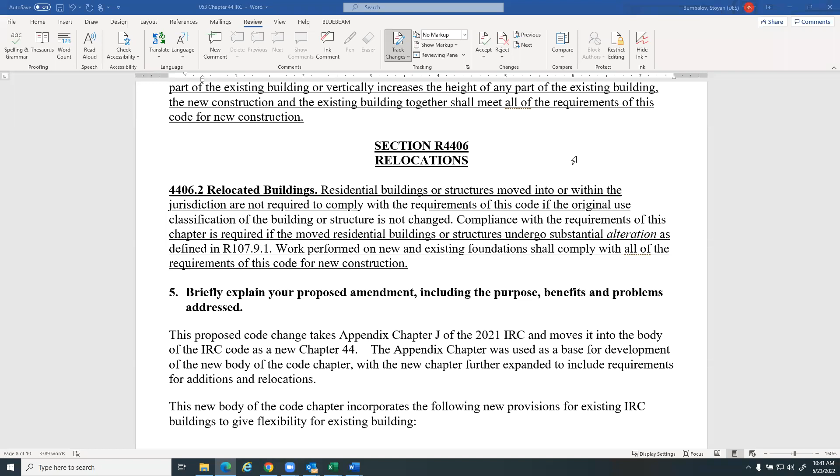Go ahead, John, you have your hand up. Yeah, just a couple things, not questions per se. Stoyan, if you could scroll up to 4404.4.2.3, the seismic piece.

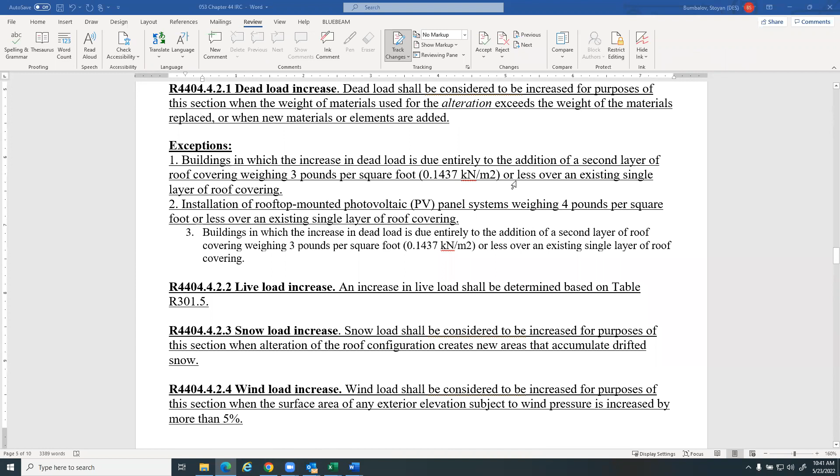Let's see, down to seismic. There you go, sorry, 2.5. The designations should be seismic design category D0, D1, and D2. That's just - looks like the footnotes got lost. I think they got yanked off accidentally.

Okay, and Sue, this loading - this particular thing on the seismic is based on what's happening at the national level, is that correct? What's being proposed? Yeah, that's correct. I grabbed a bunch of proposals with regards to modifying this appendix that were being proposed by someone else at national, and then just incorporated those in these structural requirements.

Is there value to include seismic design category E in that laundry list under the seismic load increase provisions, now that the state of Washington has E?

Good question. Considered for - that's probably a question we need to look at. We could put that in, and then we'll check into it with our structural committee. Happy to give up our seismic design category E though. Great question, Andy. I think that's something Sue can request information on.

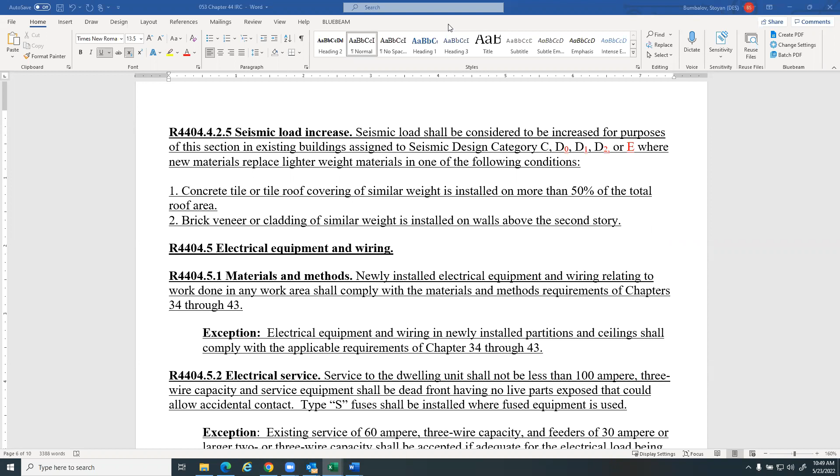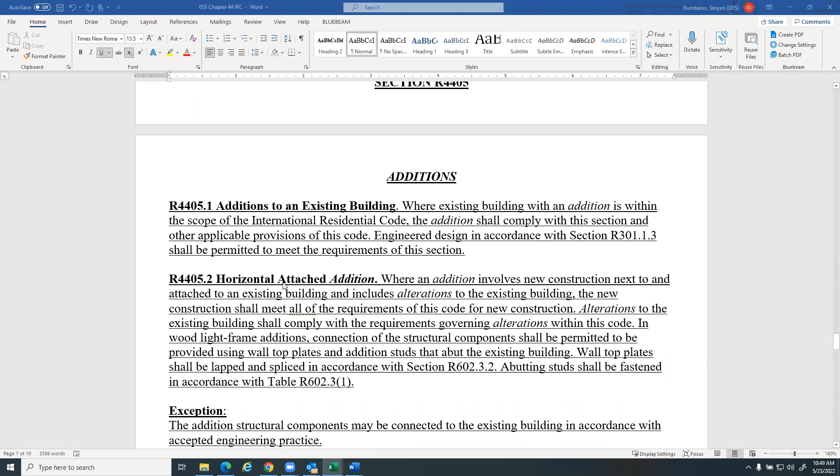One quick comment about 4405.2, the exception. I think we've got a little grammatical error there that needs to be fixed. Under horizontal attached additions, should that read the additional structural components may be connected to the existing building? Or are you trying to say the addition's structural components? Is it the additions, apostrophe S, structural components may be attached, or is it the additional structural components? Yeah, no, you're right. The structural components of the addition. Okay, thank you. That's a good one. Good question. Thank you, Annie.

And John, you had your hand up a moment ago. Did you want to add something? Basically, Sue covered it. It was that the appendix has not been kept up to date, and that was something that was very clearly pointed out to us. So yeah, there's a lot of things that needed to be fixed. Plus, it deals with some other different levels that were difficult to enforce, such as renovations, and there were just totally different terminology than what we're used to. So we felt that this was much clearer.

Would this belong earlier in the code? Maybe at the end of chapter 3 rather than at the end of the code itself? If I could respond to that, I think the idea is first of all not to make everything renumbered, which would be a terrible thing to do to staff. But also, it's similar to the way the IEBC was structured a long time ago in the UBC. For those of us who remember that, there was a separate chapter 34 right at the end of the code that dealt with existing structures, existing buildings, so this kind of corresponds with that.

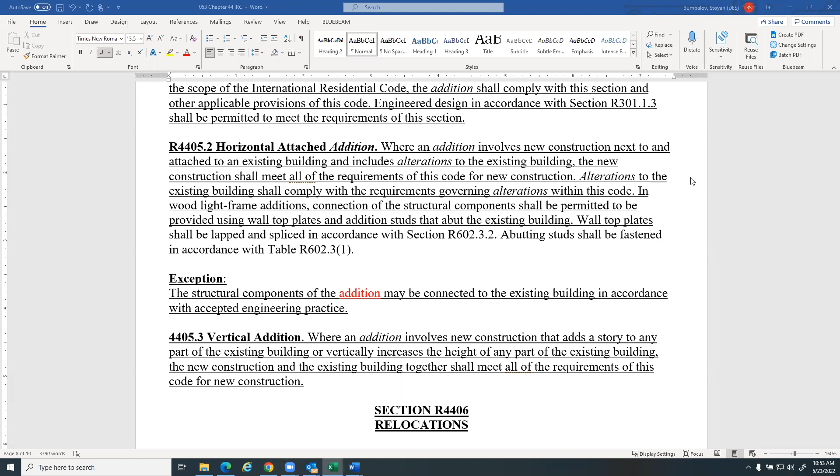Are these the same provisions as the IEBC for residential? What you're proposing? Well, no, they're different in the sense that we're more permissive for these existing buildings. It's similar, but not the same as the IEBC chapter, because that's more extensive.

So would people still have an option of using the IEBC if they didn't like something they saw here? But it sounds like this is more flexible. We aren't preventing it. I think there's definitely a movement nationally to try not to have to go to the IEBC for IRC structures. I think there is just confusion about when you do go to it and how you apply these provisions that are more designed for commercial code.

Go ahead, Troy. Question about the economic impact. We were struggling with this cost benefit analysis because we didn't have enough information. So for here, can we say that there is no economic impact, versus yes, without specifying items that will decrease the price?

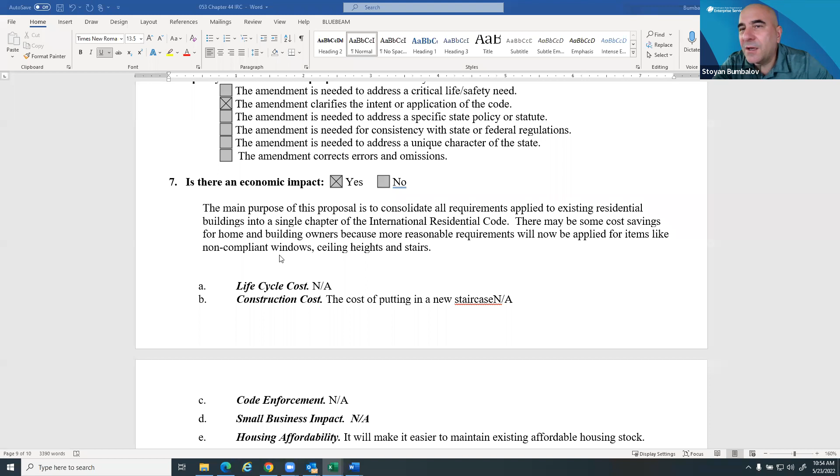I think so. I'm going to have to look at it, it looks like there might be something that got missed in this section. I mean, if there is an economic impact, it'd be less of a cost, but I'll have to take a look at that section again. Okay, if we can coordinate later on that. Okay, yeah, sorry about that, it looks like something's missing.

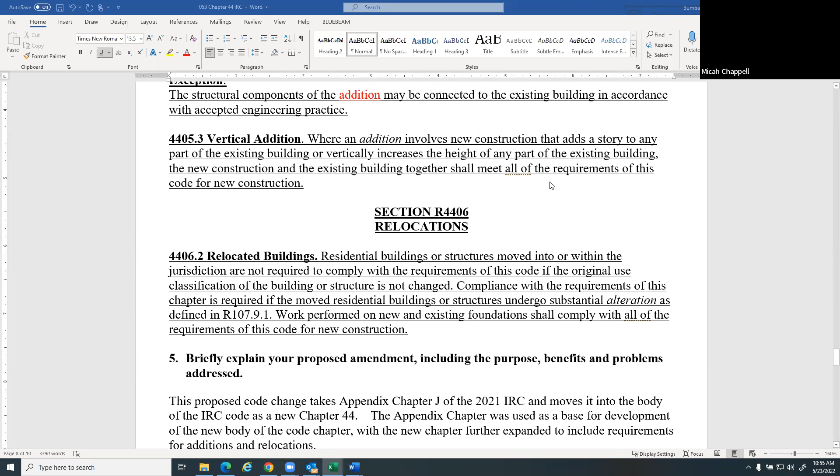And Damien, I wanted to come back to you for a moment too, and maybe some other builders, now that we've gone through the proposal, maybe answer some questions and get a little more feedback on your thoughts on this proposal. If there's anything you'd like to provide Sue for any additional comments, or what?

Yeah, once again, I'd like to take some time to read through it thoroughly, but I like the direction this is going myself at the moment. Right out of the gate, R102.7.1 gives you the option of following code or following chapter 4, the new chapter 44. And it's always good when we get all of the items for alterations and repairs into one space. So right now, this looks really good, but I would like to read it in detail.

Sorry, I'm on mute. Thank you for that input. Is there any additional input or questions, comments for this proposal from the TAG or public? All right.

So it sounds like we don't have very many modifications to make to this, or minor modifications. We would like to hear back on the Group E seismic or Category E seismic information from the structural folks. And if we can, bring that back at the next meeting, and then we can vote on this as a package, I believe, at that time, or make a recommendation to move forward to the BFP committee.

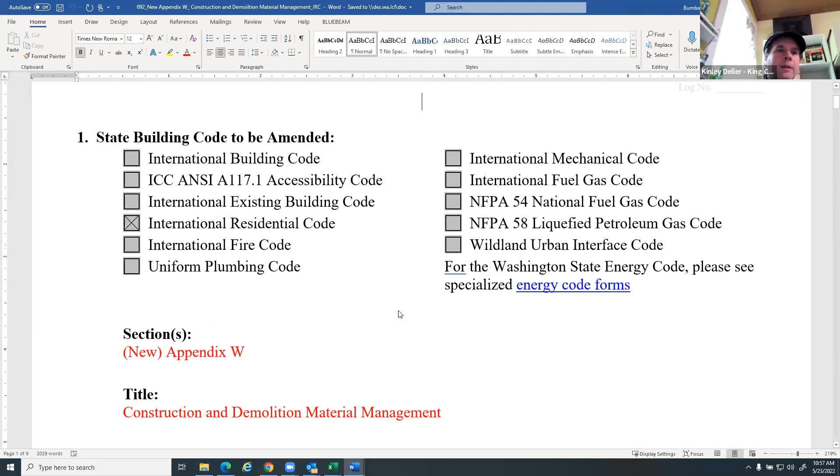I will go ahead and run through a quick overview. I proposed Appendix W, Construction and Demolition Material Management. It's an optional appendix, and the goal is to reduce the amount of construction demolition waste going to landfills after leaving construction sites. It supports the 2021 Washington State Solid and Hazardous Waste Plan and the waste reduction goals of many municipalities around the state.

For jurisdictions where material management is a priority, the language helps increase the amount of material that is salvaged for reuse or recycled, making both easier to do. There are two forms part of this code change proposal: a salvage assessment form and a waste diversion report form.

This proposal would require that both forms be used and submitted to the local building department.

Hold on just a second. All right, thanks, sorry for that. I'll see if I can keep the dogs quiet.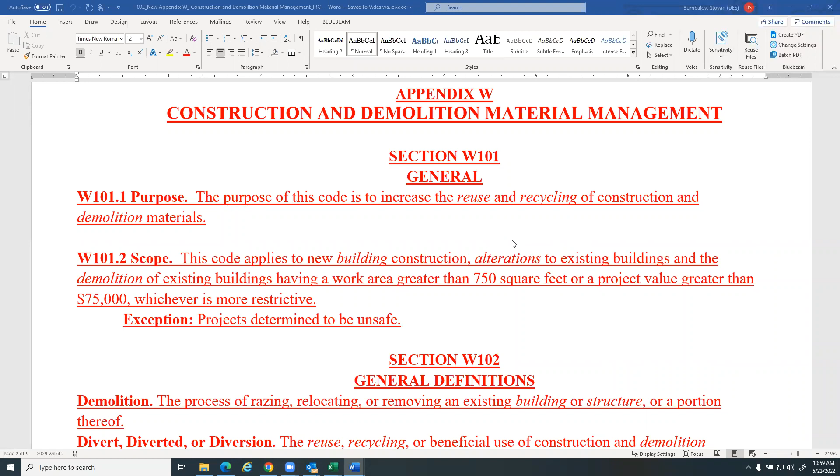Once identified, the materials in the building that have salvage value, it's a lot easier to put a system in place to recover those materials. Saving materials extends the life of the landfill, helps with carbon sequestration, reducing carbon emissions for pretty much any and all materials that are reused.

It has a special benefit for wood materials. We're working to get reusable wood out of older buildings, which is much better quality than the wood available today, and working on getting systems in place to reuse that wood.

Completing the diversion report at the end of the project would show what materials went to landfill, were recycled, or were salvaged. That allows jurisdictions to track better where materials are going from projects in their jurisdiction, and helps with reporting to the state and meeting their own diversion goals.

It's appropriate as an appendix because not all communities in Washington State have salvage retail businesses available at this time.

We're seeing statewide and nationally an increase in salvage material reuse businesses. Not all places around the state have C&D recycling facilities readily available at this time, but making this code available for jurisdictions would be the first step to supporting an increase in businesses that would use these materials.

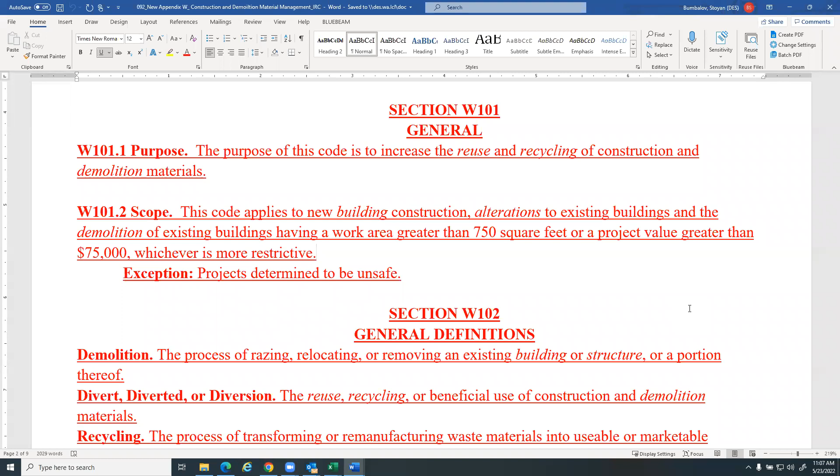Okay, thank you. I have a comment. On the affidavit that's to be signed by the owner as to where the material goes, I have a bit of concern, because the owner sometimes will just contract with Got Junk on this, or maybe with a recycling firm, and they have no idea where the material is going to be reused. You're kind of putting the owner on the hook by having them sign an affidavit.

Yeah, that's a good point. I'm trying to pull up the affidavit section here. The origin of the affidavit kind of came from what we heard from the clean air agencies and hazardous waste agencies, wanting to make sure there was some ownership or responsibility that hazardous materials were handled appropriately. That's kind of been extended here. I'm curious to hear what others think about that aspect of it.

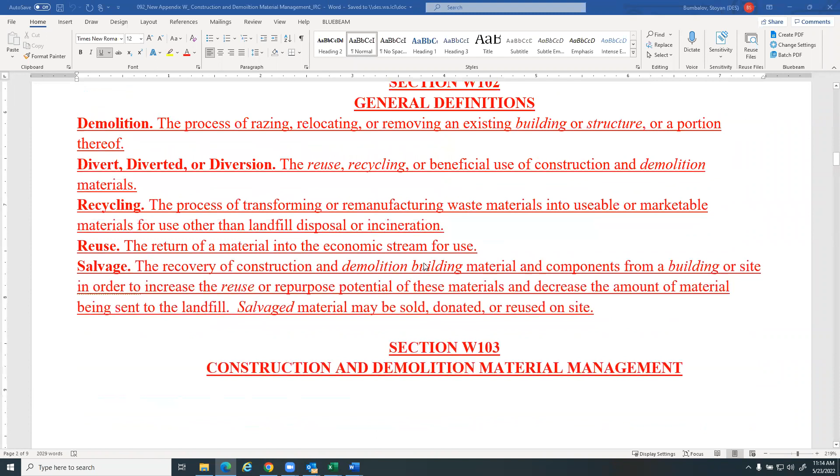So we've had discussions with our salvage retailers. Is the assessment going to take cost? No, because they're actually seeing benefit from it. They're working with the code to increase their volume, the amount of product they can move, and their profits. So I think that's an open question, a good question, and the jurisdiction would do their due diligence to figure out how the industry is going to respond. Do we have the infrastructure to do this? How could we build the infrastructure? In an equity component, it's like, how do we create these skill sets and create a new industry and labor that's going to benefit us environmentally and whatnot. So I think that's kind of open for the jurisdiction.

Hey, Kathleen, I've got my connection back. That was very good. I would just add that in the Puget Sound area, where we have the existing infrastructure, the salvage companies go out to projects and collect the materials at no cost.

Okay, thank you, Kinley. All right, Annie, we have your hand up as well. So this particular code proposal, which is in an appendix that is optional by jurisdiction, is really creating that tracking mechanism. They're required to do an assessment on anything they're demolishing meeting those thresholds, and then there's a diversion report.

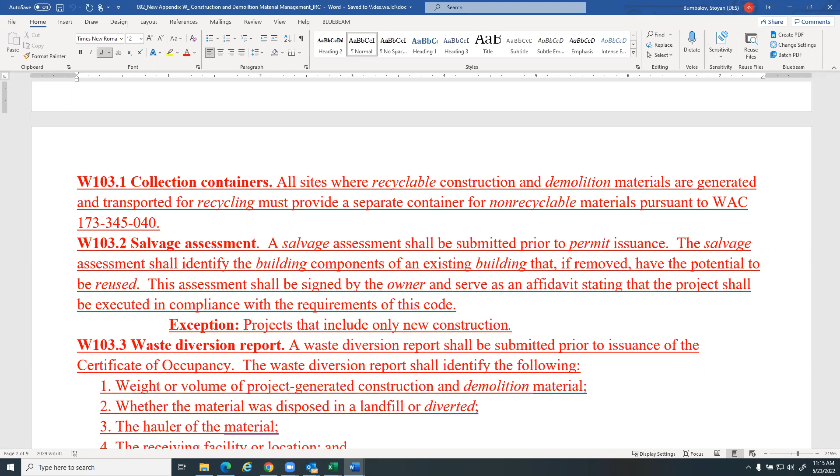That diversion report only reports what was diverted, correct? Well, in the diversion report, they place what was diverted and what was sent to landfill. So if a jurisdiction did want to keep track of diversion rates or percentages, they could off that form. It has the materials that were recycled, materials that were reused, and materials that went to landfill.

So how would somebody identify the weight or volume of project generated construction and demolition material that went to a new purpose? It's usually estimated, they usually track it by volume, and then there's conversions that are used. We have that on our website.

Well, again, I'm just thinking in terms of, say, Habitat for Humanity says, I want all the kitchen cabinets in that kitchen remodel. How is that quantified in order to fill out the report? It just seems like there's, you know, we have very few resources out on the peninsula.

Heck, our dump doesn't even take glass for recycling anymore. So it's a real tough environment out here. And I just see the difficulty of maybe completing this waste diversion report to the completeness of expectation.

Right, and I mean it's usually a rough estimate. I found that in collecting and looking at these forms that we've been using, Seattle's been using for a number of years now, that people just estimate, and usually they're not too far off. When you're trying to estimate the weight of a whole building or the volume of a whole building, how much space it's going to take up, everybody's off by quite a bit. But when you look at individual materials or a set of cabinets or something like that, people usually aren't too far off.

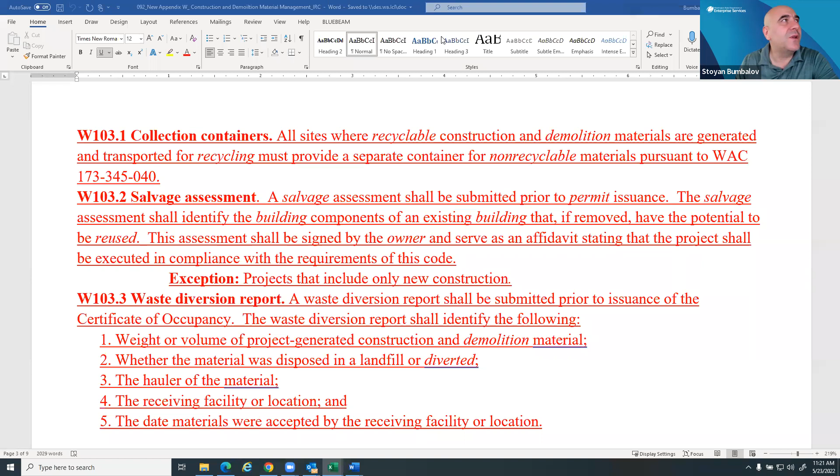There is a companion for Appendix W. There is, and this looks like an alternative language, but a similar idea. So I'm going to let Kathleen take it away. Yeah, thank you, Micah, and everybody. This actually works in partnership, or could work in partnership with the previous proposal.

So essentially, this would require deconstruction of buildings of a certain age or earlier. Deconstruction is the systematic disassembly of a building versus just crunching it up and landfilling everything, pulling it apart either with a hybrid use of machinery and human labor, or just all human labor. You can separate everything - your wood goes in a pile, your metals, your whatnot. You have the opportunity to take out appliances, windows, whatever you think or the salvage retailer thinks has value.

And so this code would basically say - again, this would be optional, and it would be for those jurisdictions that have interest in this - that buildings built or that are... I know this is odd, but it was hard to calculate what age is the appropriate age. City of Portland currently has a requirement for buildings prior to 1940 to be deconstructed instead of demolished.

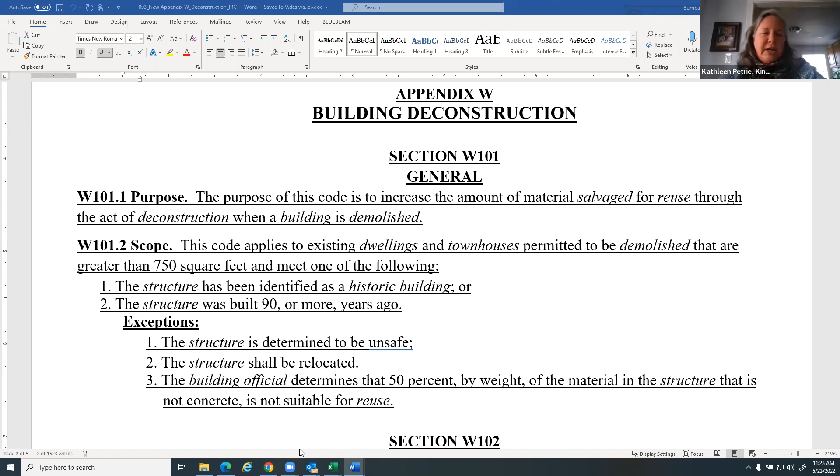So if you're single family or a townhouse going to be demolished, then you'd have to deconstruct it if it's historic. The exceptions to this would be that if it's an unsafe structure going to be relocated, or perhaps the building official, or engineer of record, has determined that the structure is unsuitable for reuse.

So whether it's mold issues or whatnot, somebody can say, hey, there's just nothing of value here. And so that's the essence of the proposal.

Just to throw in some other inputs, we have a partnering code section in the IRC, R602.1.1, which basically says that you can reuse existing dimensional sawn lumber and assume certain design strengths without having it be regraded. So these two code sections partner very well. You pull the material out of a building, you put it back into another building, assuming certain design strengths.

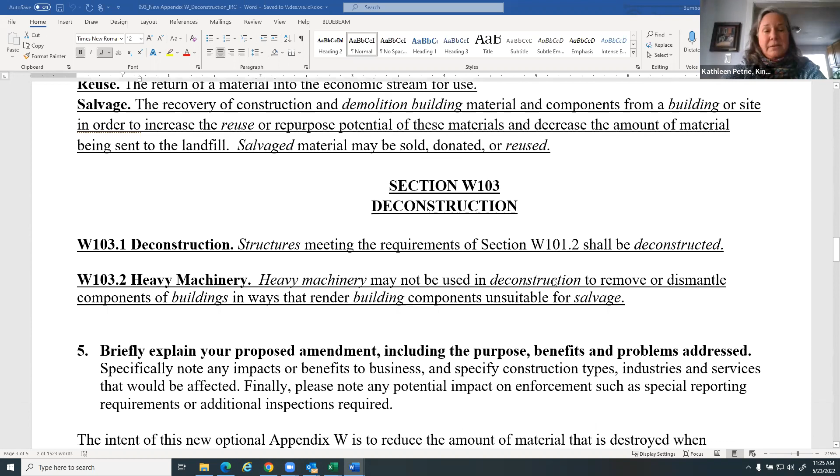And then just to throw in that carbon component and environmental component, a 2,000 square foot home can yield 6,000 board feet of reusable lumber. And if not, you'd have about 127,000 tons of debris that would be landfilled without doing this. So again, it's an optional appendix for jurisdictions who are interested. It could work in partnership or independently of the prior code bit.

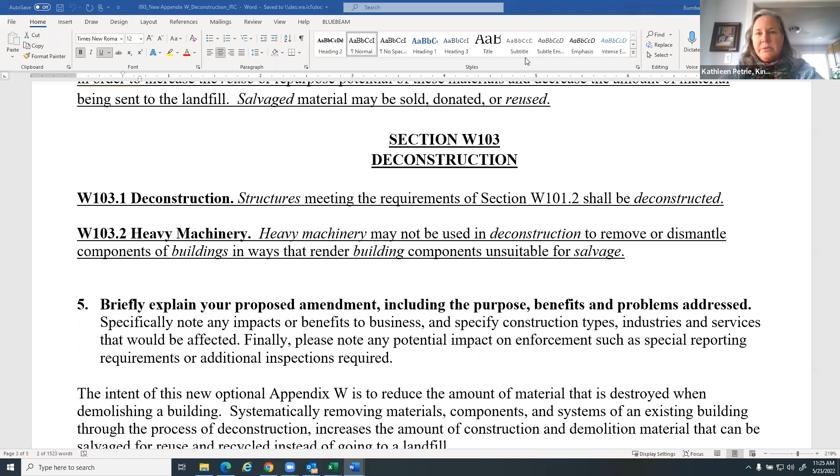Anyways, thank you very much. Would appreciate any feedback or questions.

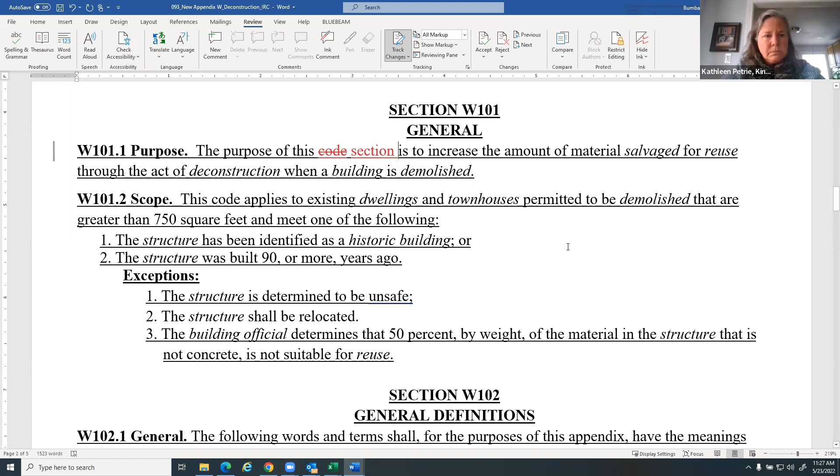Go ahead. Yeah, Micah, that's a good point, I didn't see that last time. And I just want to say thanks to Kathleen and Kinley for meeting with me after our last tag meeting, so I could bring up some of my points too. Going back to your suggestion about buildings and structure, later on in the scope they do go back to referring to structures. So it's kind of mixing terms potentially. If we say 'both buildings or structure is demolished,' and then later on 'the structure or building has been identified,' you could just somehow combine the two.

Great, thank you. And Quinn, would you like to talk a little bit about some of the feedback you provided when we chatted? Shall I present some modifications to this and see if folks are in alignment, or if they're unnecessary?

Let's see here, it's been a while. I just got back on vacation, so let's see if I can remember some of it.

One thing you had mentioned is to actually tie, per the code text, this section with R602.1.1. So I was thinking the last sentence of W101.1 purpose could just say salvaged sawn lumber may be reused in accordance with section R602.1.1.

Yeah, that would be good, at least in my opinion, to somehow refer to how the officials and inspectors would determine if structurally some of the sawn lumber is okay, tying it back to that section where it talks about what's appropriate and what's not. Great, thank you.

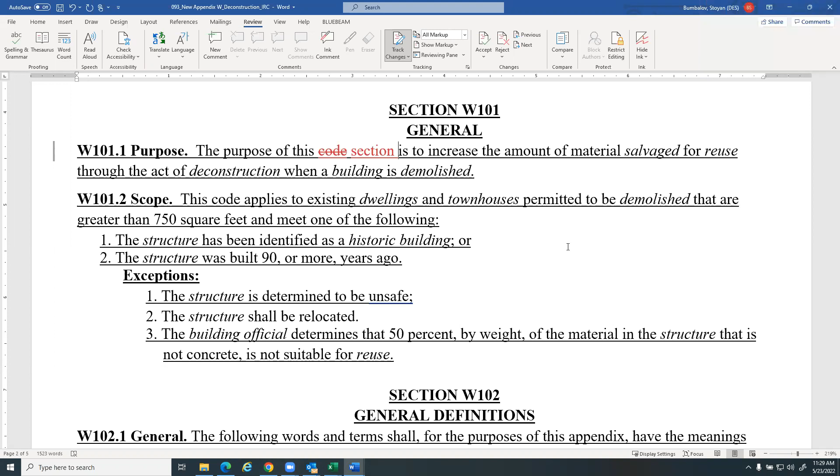I just wanted to speak again briefly about the name for the proposal. Both this one and this one were proposed as Appendix W, just because that was the next blank spot in line. We assumed whichever gets approved first would be Appendix W, and if the next one's approved, that would be Appendix X. So they're not in conflict with each other, just wanted to reiterate that. The way they're numbered, it looks like they are the same appendix.

Hey Mike, there was one more thing I remember talking to both Kathleen and Kinley about. Because this is an appendix in the IRC, kind of going back to the issue Sue had with Appendix J, there were two issues. The first is that appendices tend to be left on the wayside for every code cycle, so this would need to be updated every code cycle, not left for 10 cycles before we look at it again. The other issue is because it's in the IRC, how difficult is it to modify it? The language is vague enough to allow jurisdictions to modify it per their ordinances and then adopt it. But because of Appendix J, Tacoma had to go through the IEBC and not through the IRC. So that's something to think about as well.

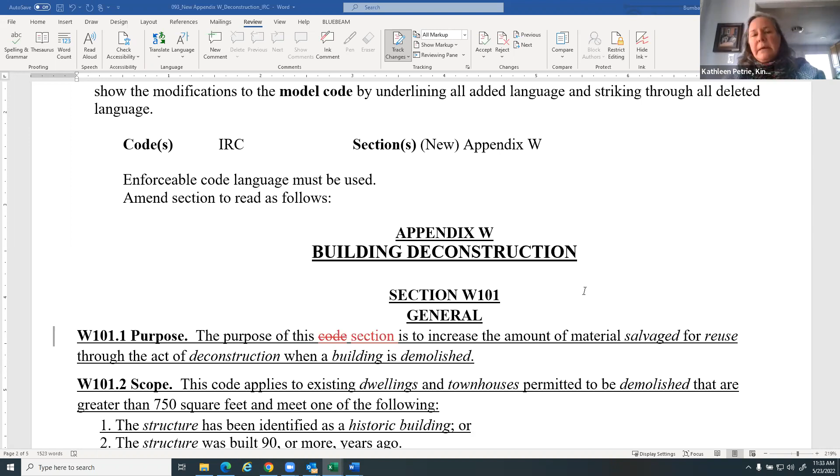Really good question, Annie. So again, this would be for the jurisdiction creating that infrastructure, making sure they have enough deconstruction contractors and salvage retailers out there that can move the material. If that's the case, then you just let the industry drive itself. So it would be up to the jurisdiction to do their due diligence on that. But there's no requirement to salvage anything. However, if you've got things source separated on site, and your location has access to proper C&D recycling, that may be a good choice. You've systematically got your things in piles and you're moving those to the right receiving locations. So I fully appreciate your concerns. This really would be language available to the jurisdiction that has that infrastructure and is ready to do this, but there's no charging language here that requires anything be salvaged or reused.

They just can't use heavy equipment destroying the building. Correct. Okay, yeah, so help me with scope.

I see that if it's over 750 square feet in size and meets one of two categories, why would an 85-year-old house not be held to this salvage standard?

Great question. It's a challenge figuring out that year, and when we can't modify the IRC, what year do you put in there? In the analysis that was done, using a 1940 date, a city like Tacoma has so much historic building stock it equates to almost 75% of their demolition permits. The year I crunched numbers on was 2019 demo permits, and I checked what of that housing stock was prior to 1940 - it was a huge percentage.

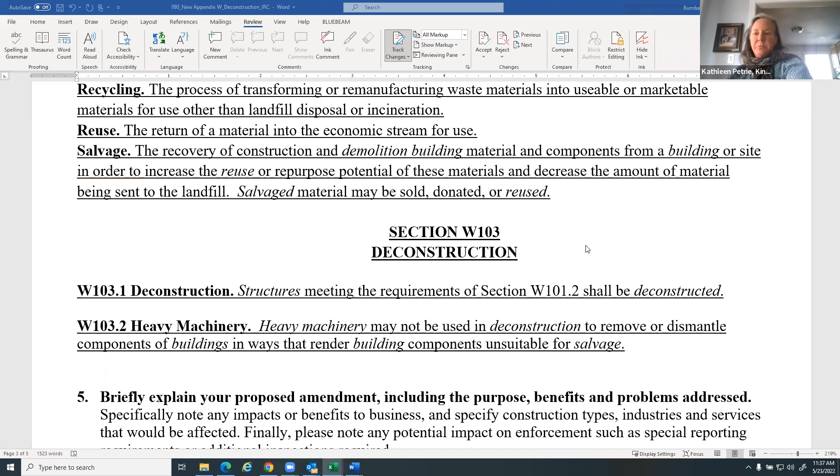Yeah, I fully appreciate that. Kinley and Alex, maybe you can share more, but to kick off a response: I think it depends on how the deconstruction is being done by that particular contractor. If they're removing nails on site, that may just be part of their process. If they're taking things away in clumps of building to be processed elsewhere, that could be a different tactic.

Kinley, are you still on the line? Or Alex? Yep, yeah, I'm still here.

There's a number of different ways that building materials can be processed, and a number of different companies around the state that do their own processing of materials. There are other systems where the wood goes elsewhere and is processed there. In the Puget Sound area, we're also looking at systems for an automatic process consolidating reusable lumber from a wide area, then doing high-tech processing to cut out the parts and do finger-joining to create new studs.

But generally around the state, there'll be businesses doing the nail removal or other upgrading of materials. Some businesses have actually found value in processing them - they purchase a property with an existing house that needs to come down, process the house and the wood that comes out of it, and use that for construction of the new building they set up there. They're finding that to be economical. So there are different models, different ways of doing it. Different companies do things differently, and each jurisdiction is going to have their own companies developing around this.